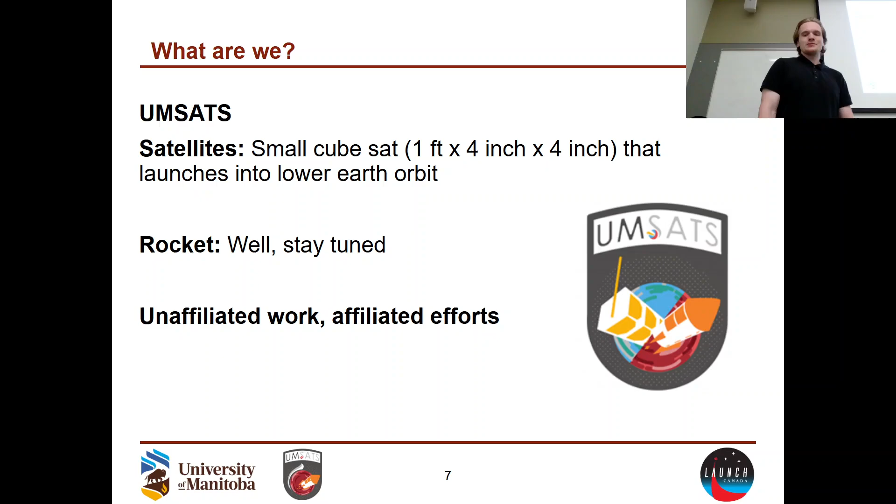Quick overview of how the structure of the team works. There are members, which most people starting off are. Then there are system leads who are in charge of most of the members — I'll explain what the subsystems are, though there's one to two leads for each of those subsystems. And then on top there's an executive committee, entirely elected individuals who run various tasks.

Quick overview of the execs. They're responsible for the upper level things; anything that's not a design typically falls into an executive position. The team leads — rocket lead, satellite lead — are kind of the overall program managers. The business lead is in charge of promotional activities to a certain extent, as well as a lot of the money acquisition projects, fundraising, etc.

HR is mainly in charge of member delegation, monitoring who's where, who's what, why, how regarding member acquisition. Finances is the person in charge of managing the funds we get, a job I'd never want to have. Promos is in charge of the websites, the social media, as well as helping business run some activities. Project manager, similar to promos and business, is in charge of running some of these activities, the outreach events. Whenever we have a booth at the tech talk fairs, project manager is also involved in that. Document manager is in charge of managing the documents, creating documents, making the documentation life easier on everyone. Lastly, president is in charge of everything.

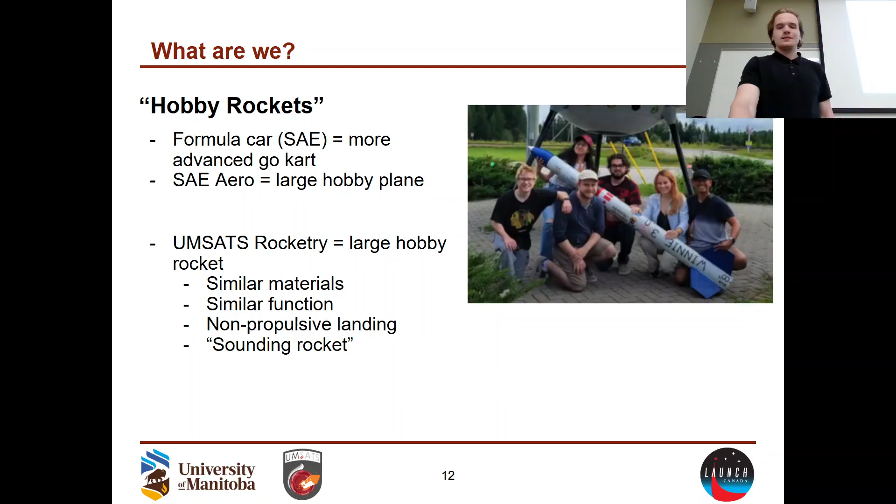I like to use this just to showcase where we are height-wise. We fly right now in the 10 to 20,000 feet range. Planes go around 30 to 35,000, so we're not even at commercial plane height at the moment, but it's still really high to the point that even in clear skies, you're not going to see it. The student world record, I think, is 100,000 feet - a space shot, or whatever that means. Gravity still applies to it.

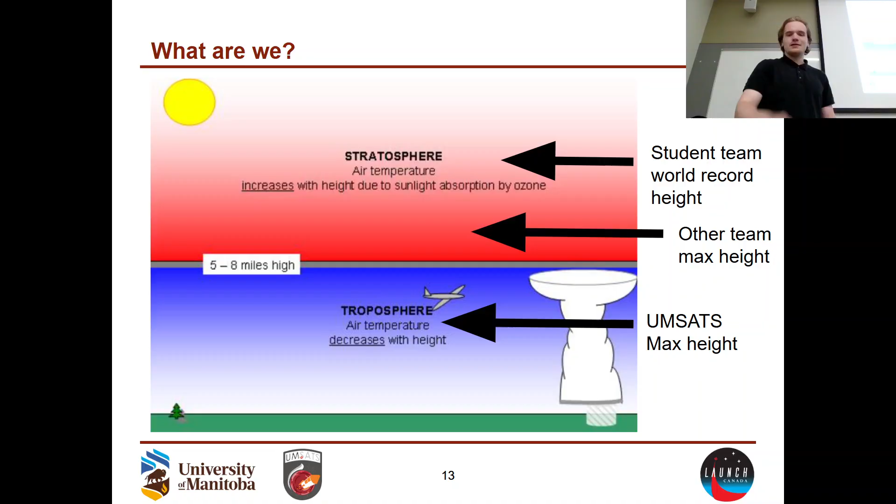Where the heck do we launch? We launch at these two competitions. The first is the Intercollegiate Rocket Engineering Competition - it's an international competition, it's in the name. 170-ish teams from 26 countries was last year's statistic. It's huge, it is a massive competition. Name a university, they've attended it. Name a university, we might have beaten them to technically.

It takes place in Midland, Texas. It used to take place in New Mexico under the name Spaceport America Cup. Ultimately that organization decided they wanted to do more, so they found a different launch site so they could do more.

The other one is the Launch Canada Challenge. You'll hear about that, it gets the name LCC all the time. It's the local one, the local talent. There's a couple high school teams, but name a Canadian university and they're either going there or hoping to go there, as long as they have engineering programs. It takes place in northern Ontario, Timmins - 5, 6 hours north of Toronto, 20 hours from here. They're both far from here, but you'll see why.

Quick overview of what they're going to do in the competition. The first couple of days are the 'check what everyone else is doing' calm-before-the-storm kind of days. You get to go inspect everyone's rockets, ask them a million questions, take pictures - I like this idea, I like that idea. While that's happening, the judges will come around. They'll typically give you a heads up, but they'll look at your rocket and say, 'Nose cone, what's that made out of? What analysis have you done for it? Body, talk about this, talk about that.' Then you'll get some competition scoring based off that, based off the construction of the rocket and your ability to present it to them.

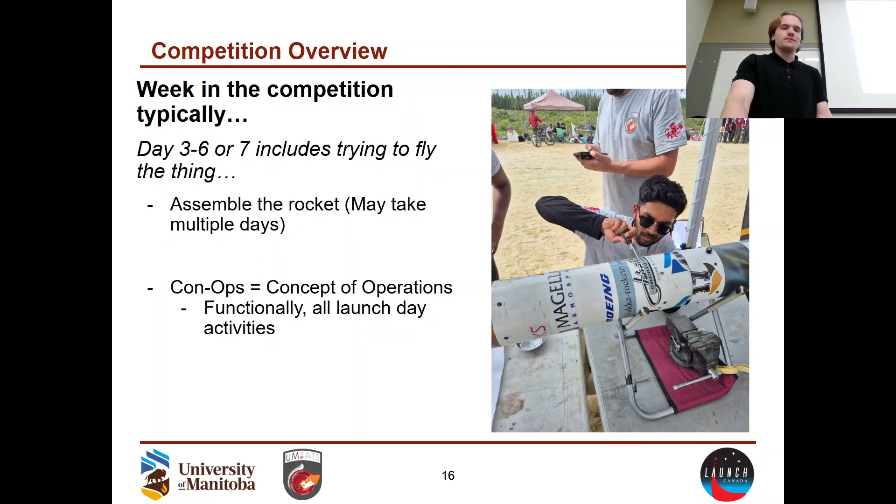Once you successfully assemble the rocket, you're going to line up for this last inspection. They're going to be pretty harsh on you because they're signing off on the rocket and they're saying, "Yeah, I'm cool with this thing going Mach 1. You nuts? This thing's going to easily survive."

Another thing that really makes it fun but also stressful and intense is the fact that at both competitions, there's a first come, first serve system. If you are there at 6 a.m. and your rocket is ready at 8 a.m., and no one else's rocket is ready at 8 a.m., you get to be the first one to launch that day. And yes, there are incentives for launching earlier in the week.

They don't want everyone to ensure their rocket is ready all at once, because I'll ramble about this later - you might not get to launch on the last day, as well as no one wants to launch all 40 rockets trying to fly on the very last day and none in the previous 3 days. So this first come, first serve initiative, as well as the bonus points, definitely adds a bit of stress to it.

Let's say your rocket passes - not always the case. Then you take your rocket to the launch pad. As you can see, there is a launch rail here. This guides the rocket, so it needs a little bit of momentum to fly stably. I'll ramble about that later.

Now is also the time where if you have electronics, you're going to want to turn them on. A lot of the electronics have a battery life of 4 to 6 hours. They're designed to be easily accessible from the outside somehow. I'll ramble about what switch mechanisms there are later, but now would be the time you turn on the electronics.

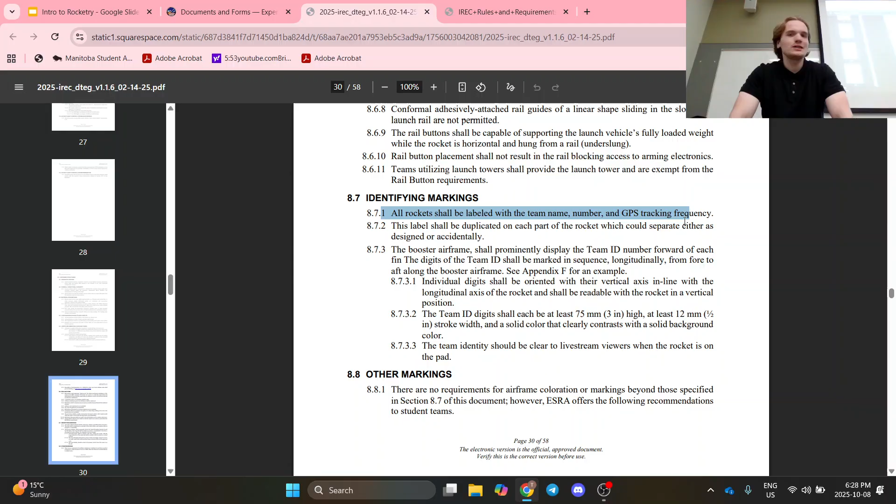Identifying markings, section 8.7. Does this tell me anything I should know before I start painting the rocket? Maybe it does, maybe it doesn't. That's it. All rockets should be labeled with team name, number, GPS tracking frequency. Okay, maybe let's involve that in my painting. Team ID number, let's involve that in my painting too.

A lot of the questions I typically get asked are like, hey, do you think this would fly? I literally just go here first. Similar ordeal with the Launch Canada website. You just go to LCC, or launchcanada.org, and for the IREC one, you go to esrarocket.org. Now you can find very quickly teams, rules and requirements, design test and evaluation guide. So whatever question I have, I would look here first because these are the rules that even I'm going to have to follow.

The other thing I'll mention here, if you go to ESRA Rocketry on YouTube, these guys are really good for showing every launch ever. You can see they even put all of the launches here, so you can just find, say, I want to watch Chosin's launch.

Similar ordeal with Launch Canada, the only thing is they don't do the timestamp thing that IREC does, so you're gonna have a hard time finding them, sadly. I can remember where our launch was, but beyond that, I can't remember anything else.

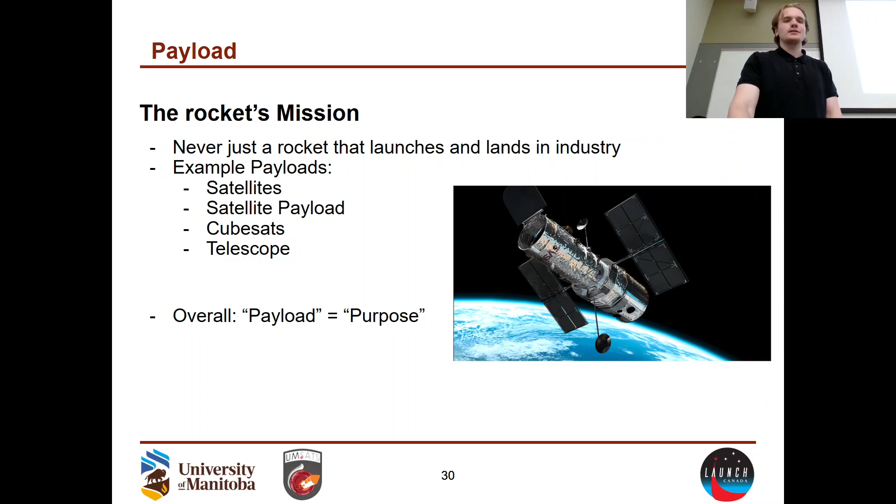In our context, it is a small experiment that utilizes the rocket's flight. I call it backwards because I just said that every rocket needs a payload, but in our case, we are launching the rocket first, and we're thinking, hey, we're going to have a rocket that's doing this. What can we learn from it?

However, this experiment still has value. If the payload is designed right, it can utilize the rocket's flight well. It is the test experiment that is being conducted as we are launching, and it doesn't interfere with the rest of the launch at all.

This is a rule I've heard rumor that it might change. However, in our context, we have to design a payload to be this kind of cuboid structure. It's called 3U. 1U is a 10 by 10 by 10 centimeter cube. You stack three on top of each other, you get this 3U monstrosity.

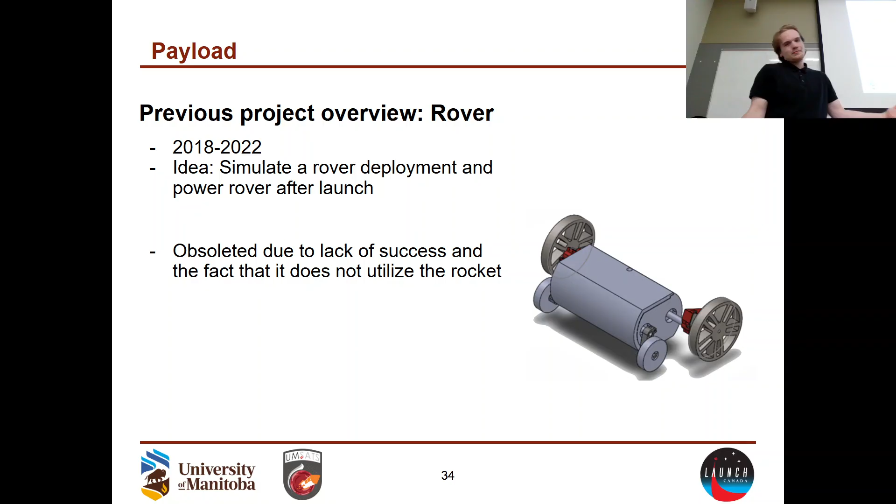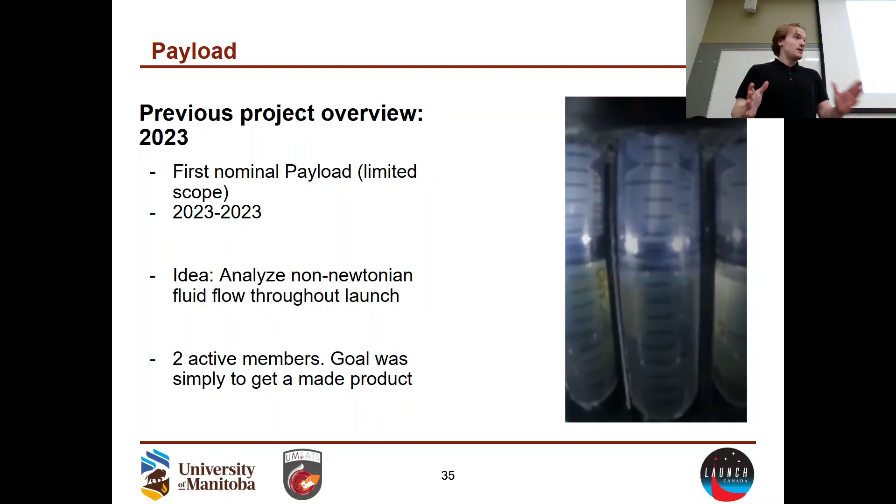Fun fact, this was the first and only nominal payload and first and only successful flight we've had on rocket so far, which is funny because it was a rush payload and many valuable lessons were learned from this payload.

One of the major lessons learned, which is why I call payload the hardest team, is that they have such an obscure problem where you have to do something someone's not done before, do it well, and have it fit in this niche minimum mass cube.

However, the payload still has a lot of purpose to the team. First thing I'll mention is that if you don't care about the rocket, that Pulse idea was really cool. If you're a civil engineer and you hate rockets, well, our rocket is going to analyze fake blood vessels, and it's going to be a concept that we could analyze during flight.

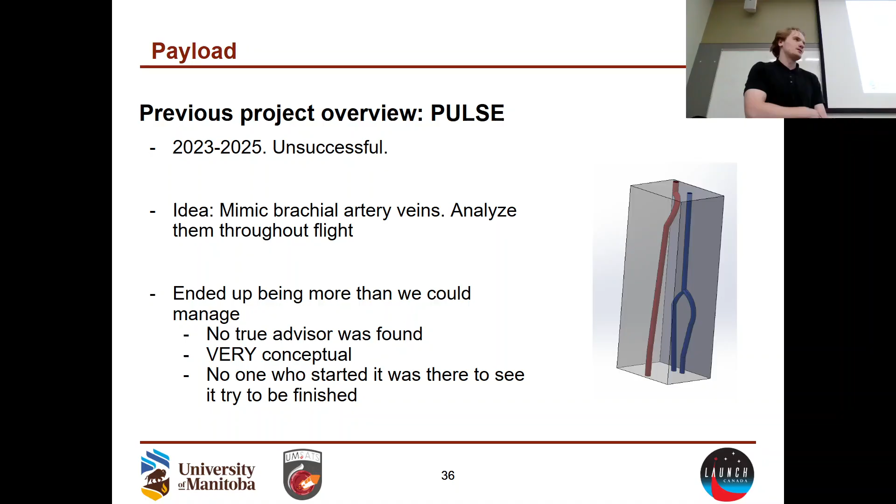The other thing is that all the teams, all the competitions, do have incentives for payload. It does feel like the vestigial organ of the rocket. However, there is a lot of good value for having a payload on the rocket.

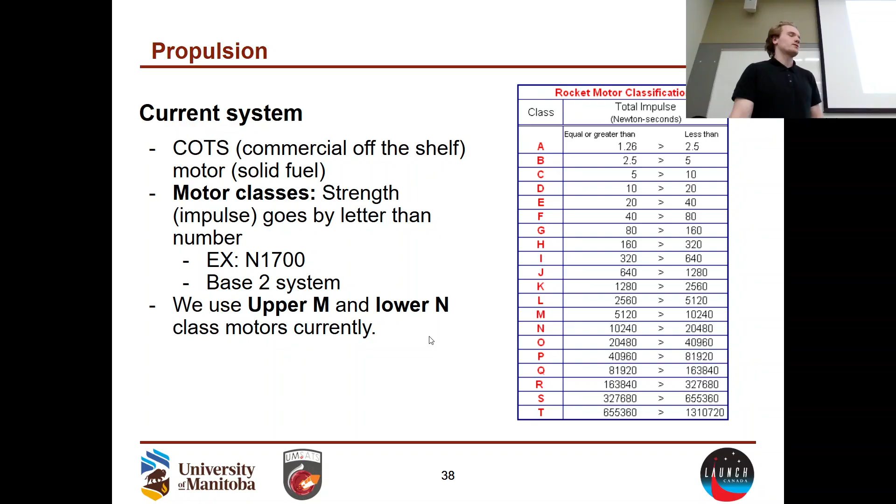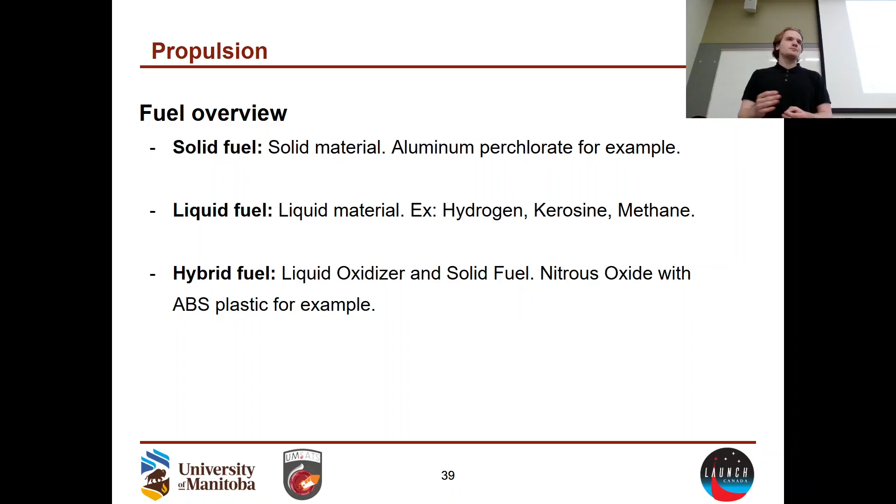Lastly, there's a hybrid fuel, which uses a liquid of some sort to emit an oxygen reaction for the solid.

Going back to the current system, we have two commercial off the shelf distributors, Cesaroni and Aerotech. You'll hear the word Cesaroni a lot more in Launch Canada because they directly deal with them and they are Canadian. The caveat is that they have slow lead times. Aerotech has better lead times, and they are American, so it's easier to get it in America.

Quick overview of the motor casing. The motor system has reloads with codes like M3400 and 1800, and these motor reloads go into these motor cases. The motor case consists of a closure set and the overall casing set. The reloads are one-time use, but if you don't damage the case, you can use it a couple times.

When we aim for the motor, we look at things such as thrust, burn time, impulse, etc. I'll ramble about some of those parameters and why they matter later on. However, it is a bit of a bottleneck because we are limited to what is available in the market and not what is available in-house. We don't really have the ability to modify parameters. We just have to buy what's there and live with whatever lead time or price they give us.

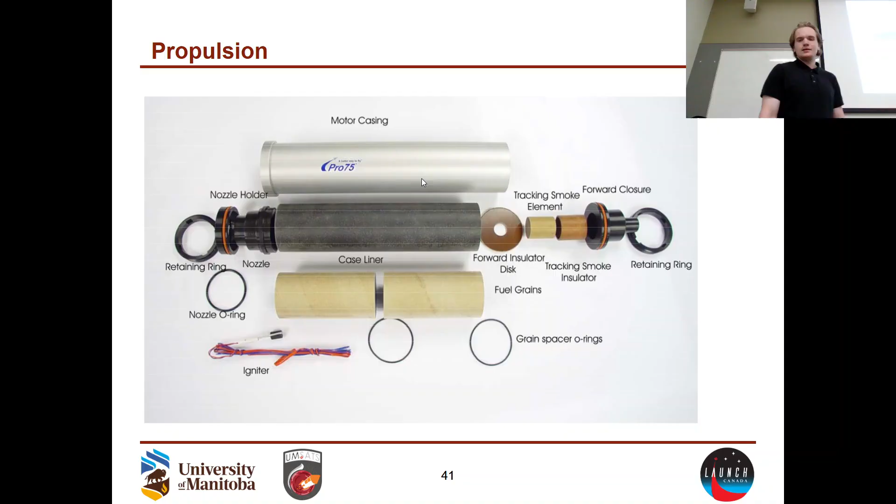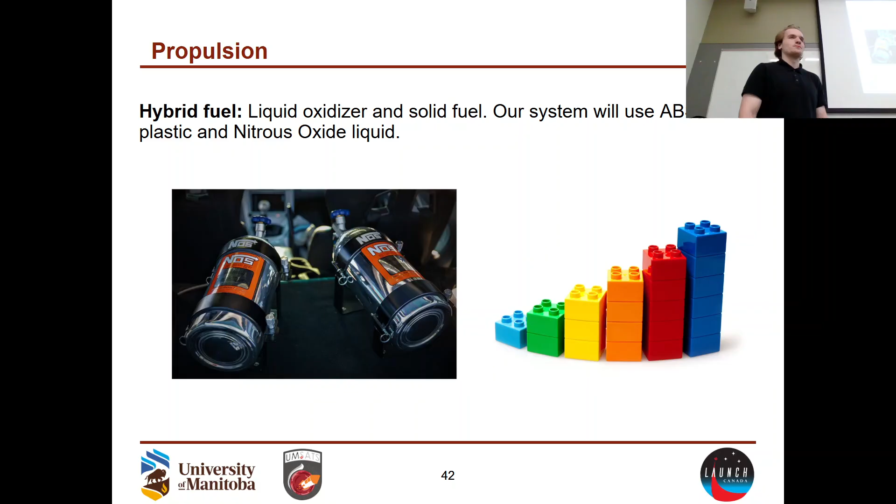Now I can ramble about the hybrid propulsion system. We use a combination of NOS and ABS plastic, so we use laughing gas and Lego blocks, and we merge it, and that's how we are currently developing our own propulsion system. Fun to think about.

We call it Project Sunfire. It started in 2022. As of now, we hope to have a stationary motor test, a static fire, by 2026, and then look to have it in a flight by 2027.

This is what we call the small scale hybrid test. We wanted to verify initial calculations and not spend the entire house on a system. So the motor is about this long, but it did verify a lot of the analysis we had already conducted.

Quick system breakdown of where they're at so far and how they delegate their own tasks internally in this hybrid program. They use an ABS plastic cylindrical bore for the fuel. As we discussed before, there's an oxidizer that is going to go in there and make this ABS plastic way more reactive. ABS plastic is basically a very combustive hydrogen chain, but it's in the form of plastic, so we can 3D print our fuel, which is really cool.

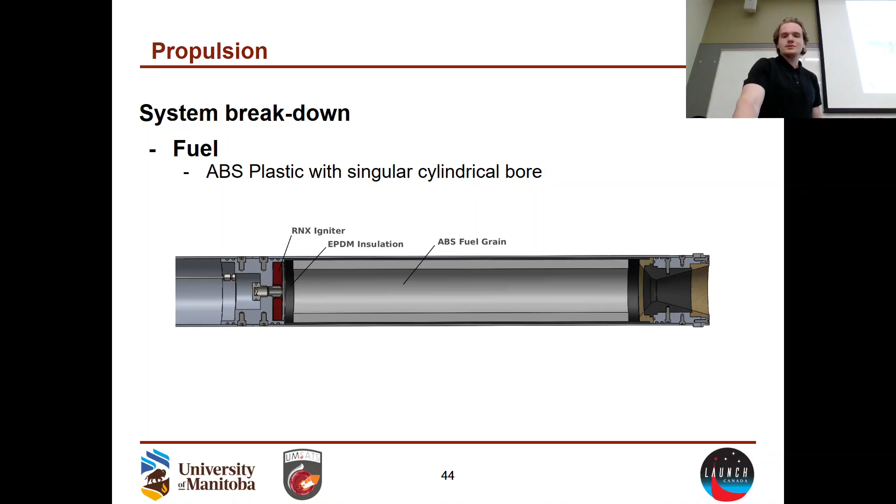Then there's a nozzle, which has the objective of accelerating whatever combustion reaction, which does create the thrust and impulse we want.

Then they want to have the fluid flow in a specific orientation. That's when the fluid supply system comes in. They want to inject it in a certain orientation and at a certain rate, as well as deal with the interesting issue where liquid NOx is not fun to transport, so they want a filling station they can quickly go up to the rocket with and implement that fuel, so we don't have to sit with fluid that doesn't want to be liquid.

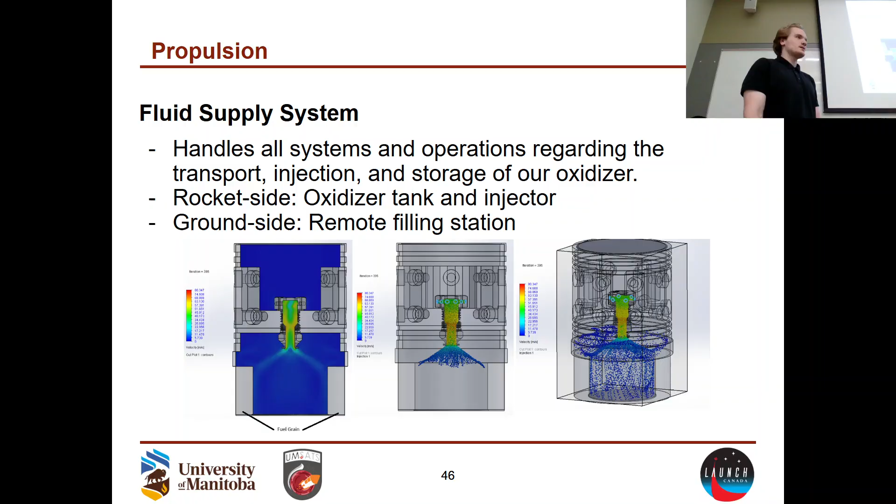There's an igniter system which is in charge of burning the motor at a certain rate and orientation, for a certain duration of time. They want the motor to burn for as long as possible to ensure everything reacts and we don't lose a lot of potential height.

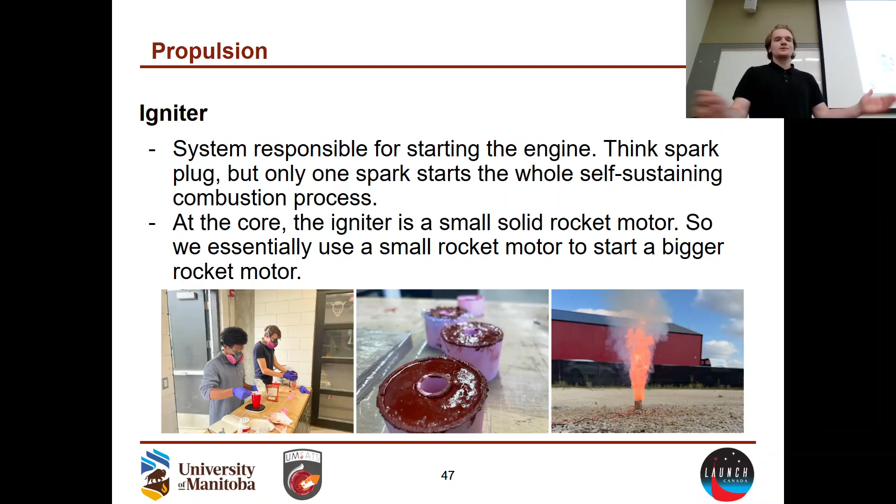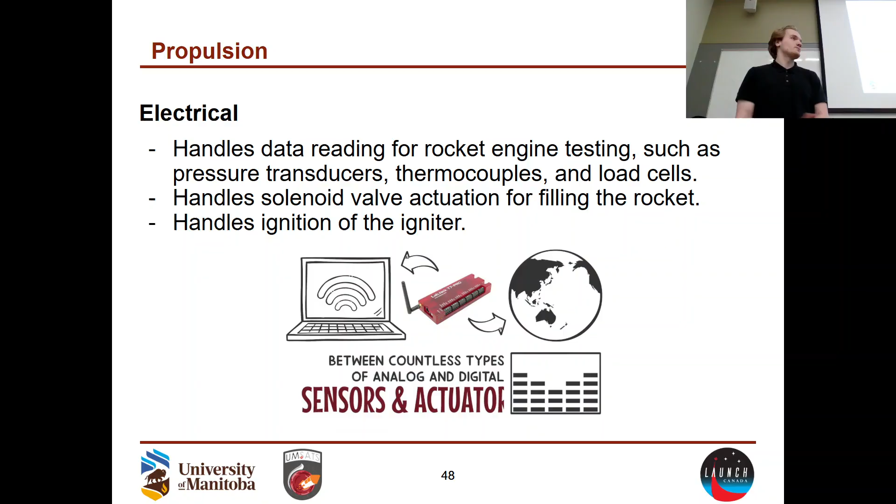There is also an electrical system which is in charge of all of the electrical components, which involve the valves, load cells, as well as what is going to cause the igniter to ignite from far away, because we obviously don't want to be 2 feet from it. We want to be a kilometer away from it.

As discussed before, it started in 2022. Over 50 students to my account, peaking at around 24 members who have worked on it. The static fire target is 2026, and they want to implement it into the rocket in 2027.

Someone just came in and locked the door. Okay, whatever. Next up, the breaks after this, I promise.

Flight dynamics was a brand new subsystem that I invented. The purpose of this team is to design the fins and nose cone to optimize the Barrowman score I discussed before for flight simulations. They're also in charge of specing the commercial off-the-shelf motor, and hopefully, as years go on, more thorough aerodynamic analysis.

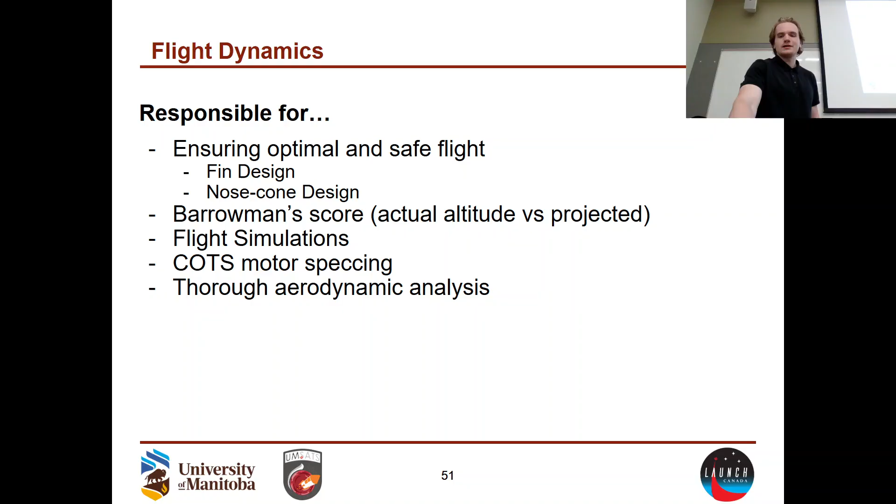In case you didn't know, the top of the rocket is called the nose cone. The fins on the rocket are called fins.

For simulations, we currently use a software called OpenRocket. There are other alternatives, RasAero and RocketPy being the two most discussed. The idea is we trust these guys - I believe OpenRocket was a master's thesis project. We put it all in this software and it spits out flight projection, speed projection, stability, etc. Everything we care about for flight simulation.

The overall idea is that the CAD model, the physical models, and OpenRocket should all, to some extent, agree. It uses the sizes and masses of everything, and you can input commercial off-the-shelf motors or upload your own thrust curve, as well as wind speed. You can implement whatever wind speed will be there, and it factors that into the calculation.

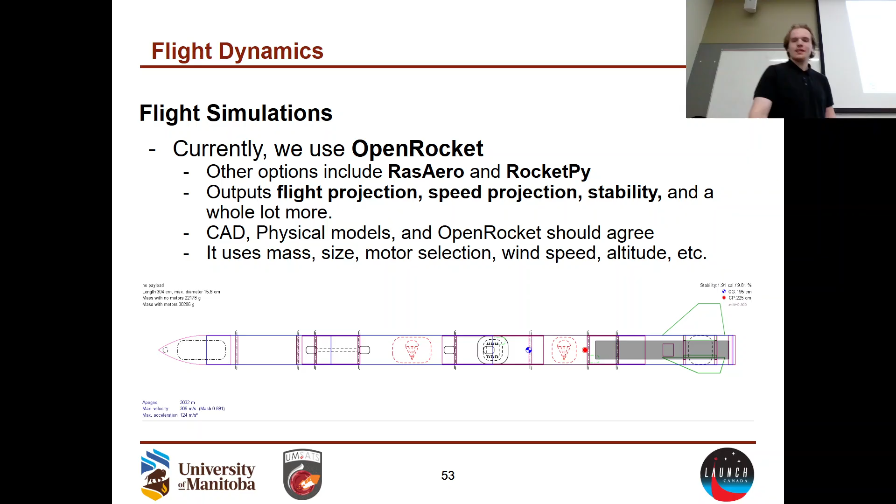To some extent, and as we discussed before, we want those points for accurate altitude, right? So there is some risk we do impose at the moment for trusting everything for OpenRocket. Our good guess for OpenRocket is the best we have for a lot of the points we could be getting. We rely on OpenRocket for a podium position, which is crazy to think about.

Oh, there we go. That's where this project comes in.

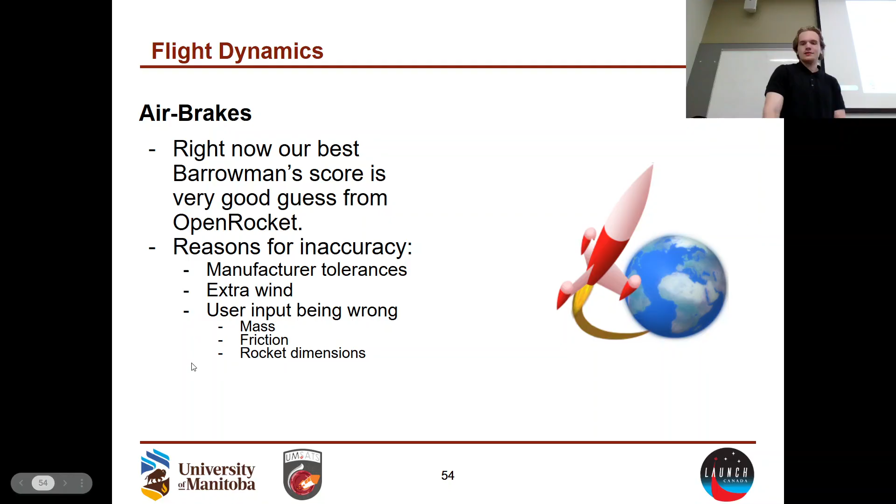This allows us to account for all of this potential information being wrong, as well as it's a cool project. It started a little over a year ago. We're hoping to implement some variation of it in this upcoming rocket.

There's a lot of math and science to it, and the idea of the system is that the first system's going to suck, the next one's going to be a little better, and so on, and as those years go on, we get a better and better Barrowman score.

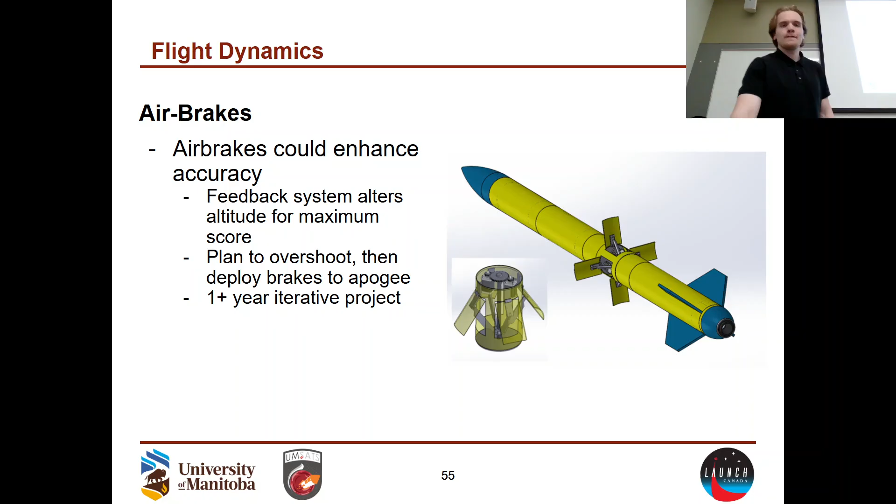Back to flight simulation discussion. Some of the values that you'll see matter. The first one is the stability margin. The purpose of the fins is to lower the center of pressure and keep the center of gravity above.

I believe the metric is calibers - however many times the diameter of your rocket, a caliber is the diameter of your rocket, is between the CP and the CG. So a stability factor of 2 means that you're 2 calibers above your center of pressure - that's where your center of gravity is. Why does rocket stability matter?

Well, as we discussed before, there's these launch rails that are only 17 feet tall, so you have about 17 feet to gain enough momentum to safely fly this rocket, basically.

That being said, there is such thing as a stability that is too high. Everyone has a different upper number - between 4 and 6 are the numbers I've heard the most. The idea is if you're at a certain stability, your rocket starts to go with the wind instead of on its projected path. So we have to do some level of analysis through OpenRocket to ensure that we are stably flying.

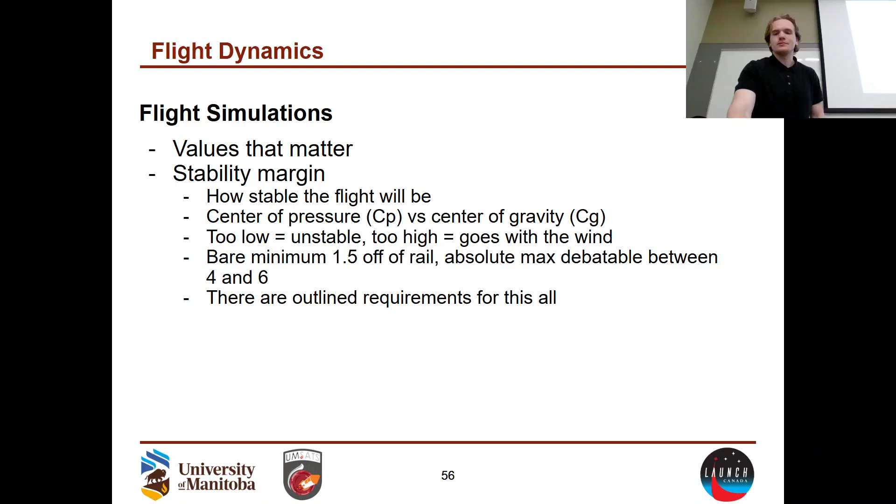It's pretty well worded in the requirements. Next thing, as we discussed, velocity off rail. You have about 17 feet to get to a certain velocity. The number that is safe is 30 meters per second.

However, requirements are going to say 15. If you're in the 15 to 30 range, you typically have a discussion with the judges. They're going to say if your wind speed is less than 15 kilometers an hour, we're going to trust this flight.

That being said, it's also outlined in the requirements. It is a value we're going to watch. We want to make sure that we are adequately fast off the rail.

Top speed - if you're at Mach 1 flat, then the drag is really, really high. So you want to avoid Mach 1. You want to punch straight through it or not hit it to begin with. Supersonic flights generate a lot of heat. Subsonic flights do allow us to get away with a lot. Historically speaking, we've had Mach 0.8 to 0.9 flights, which is really fast still, but that has definitely permitted us to do a lot dumber stuff than this year's flight.

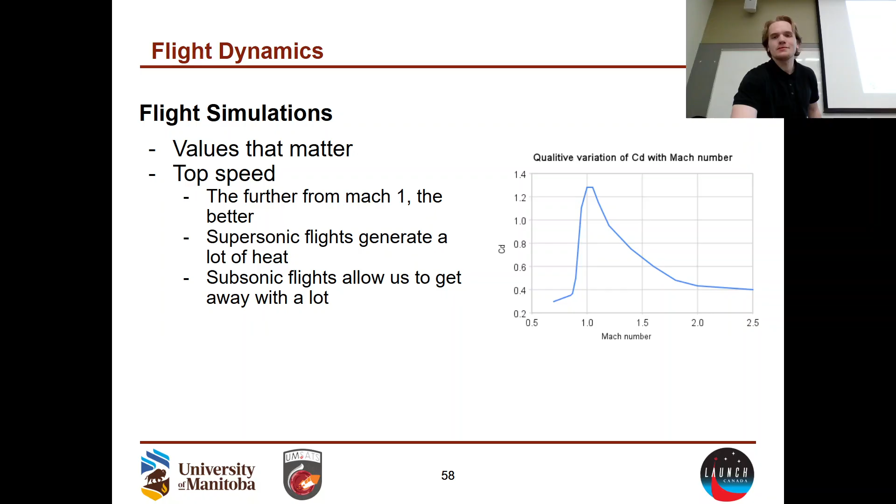Quick overview of the nose cone design. For subsonic flights, a round tip. For a supersonic flight, a really pointy contour. Transonic is between subsonic and supersonic - that's the Mach 0.8 to Mach 1.2 number discussed before. Please don't go there. Please don't peek around there. Please avoid that speed.

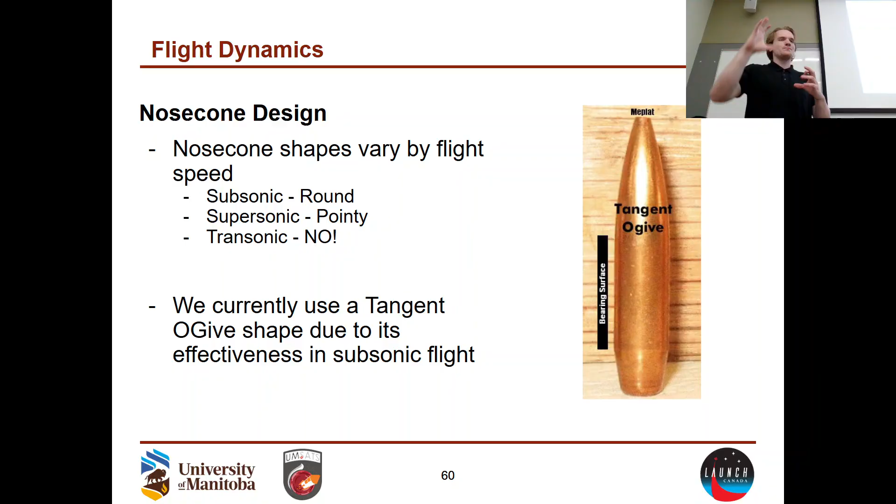Past couple of years we had this tangent ogive shape, which you can see here actually. There's a mathematical way to derive it, as in this mini rocket I made. The big picture point is that the shape is that shape for a reason. So let's not have a flight that's not within the threshold we designed the nose cone for, please.

Fins - I mentioned this before. You want to drag the CP back and have the center of gravity higher, CP being center of pressure. OpenRocket does help optimize the fin shape as well.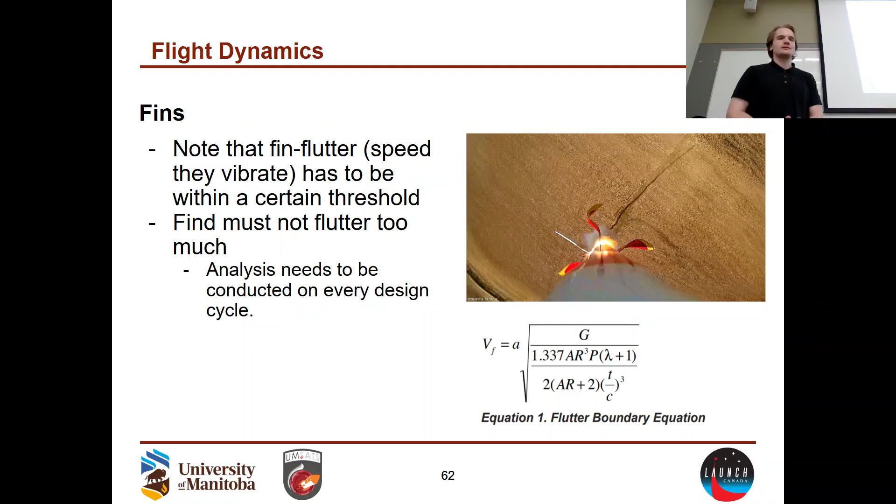More fin analysis that's done is called fin flutter. Ideally, you don't have this much flutter. There's a certain threshold that the speed the fins vibrate has to be within, and there is analysis conducted to ensure that it is within that threshold.

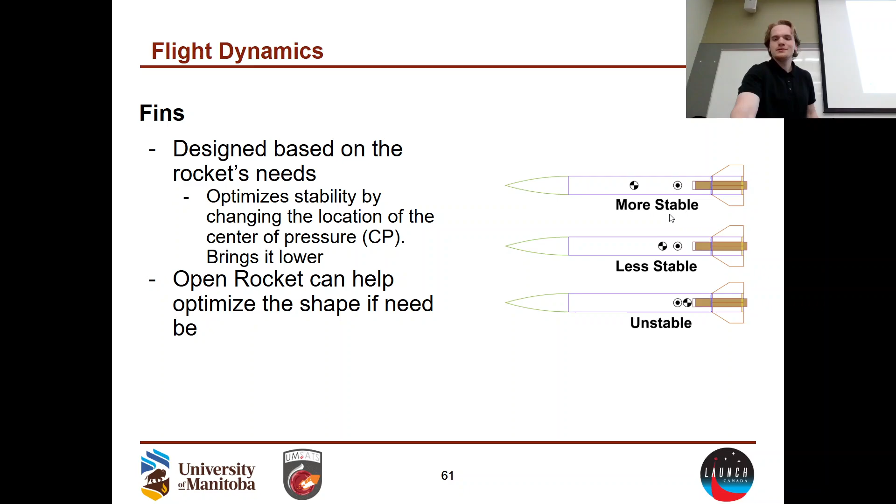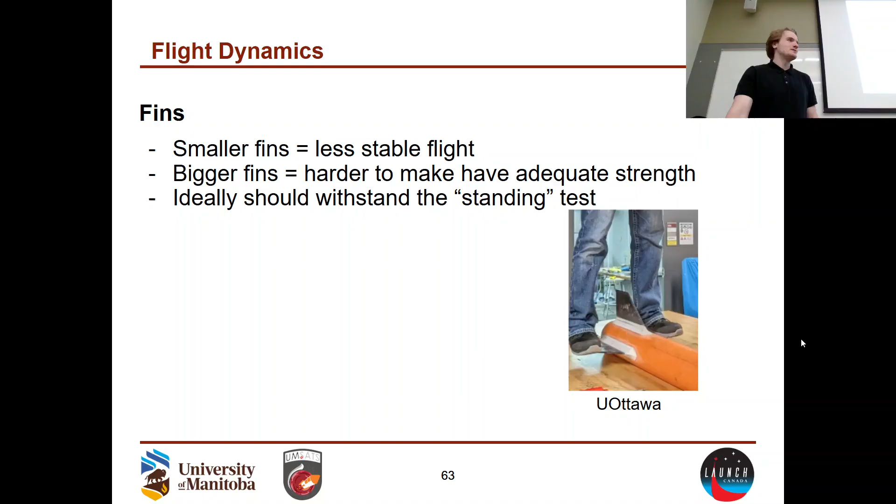There is this balancing act with fin design as well, I'll mention. If you make smaller fins, you have a more upward center of pressure. If you make bigger fins, you're gonna have to justify the strength of them better. All in all, if you can stand on them, like UOttawa did here, you're good to go.

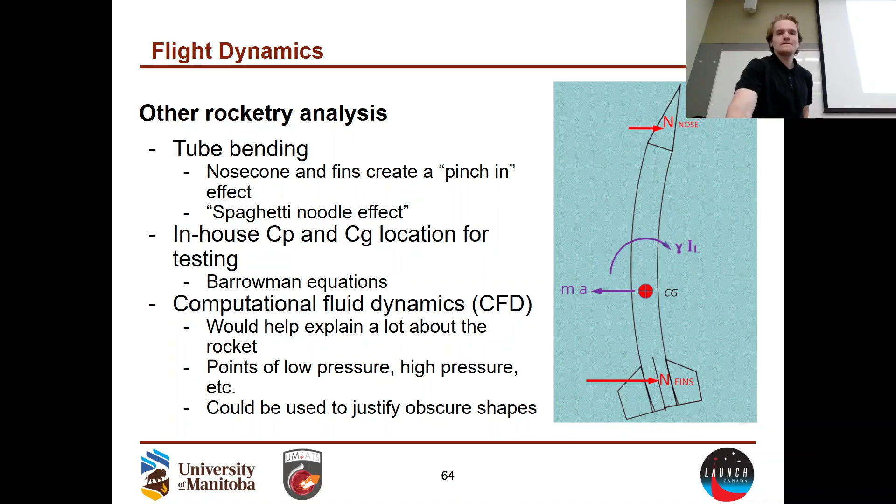I want to break it. I can keep going if you all want to. Yeah, yeah. All right. Any questions? I either explained it really good or really bad, I hope. All right, I'll go back and do it. All right, I'll get to it then.

Recovery. As we discussed before, SpaceX does a lot of propulsive landing launches. We're not allowed to - that's a bummer. The solution is we separate the rocket somehow, segment it out, and we land with the parachute system of some sort.

Separation - sorry, I should have mentioned this here. We typically segment recovery tasks into two categories: separations and parachutes. Separations is in charge of separating the rocket to deploy the parachutes. There are some - go ahead.

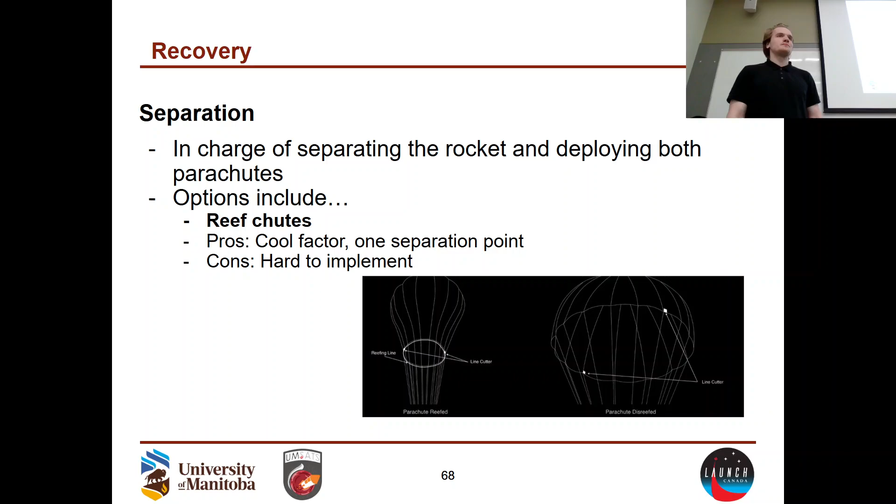I have a whole demo. You put the shear pins in. Also, for context, shearing is a failure mechanism that is caused by bolts breaking radially.

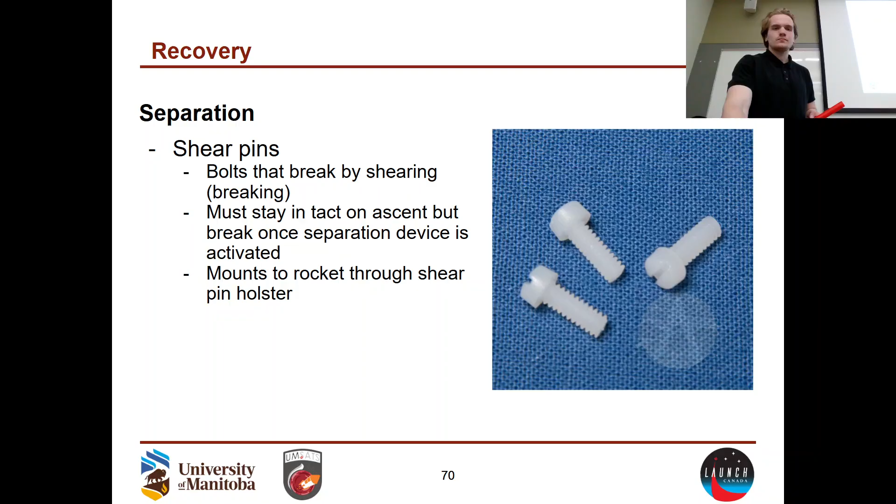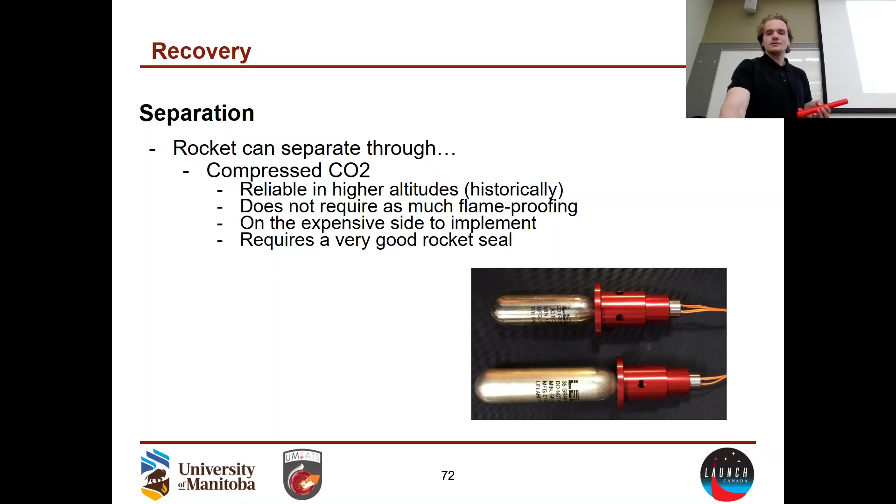Then, if you want to separate the parachute, you literally break the shear pins, and plastic bits go everywhere at 10,000 feet in the air.

Hobby rocketry - you want to do some level of analysis to justify that the amount of black powder and CO2 you use are sufficient. Even after the analysis, you're going to want to test it.

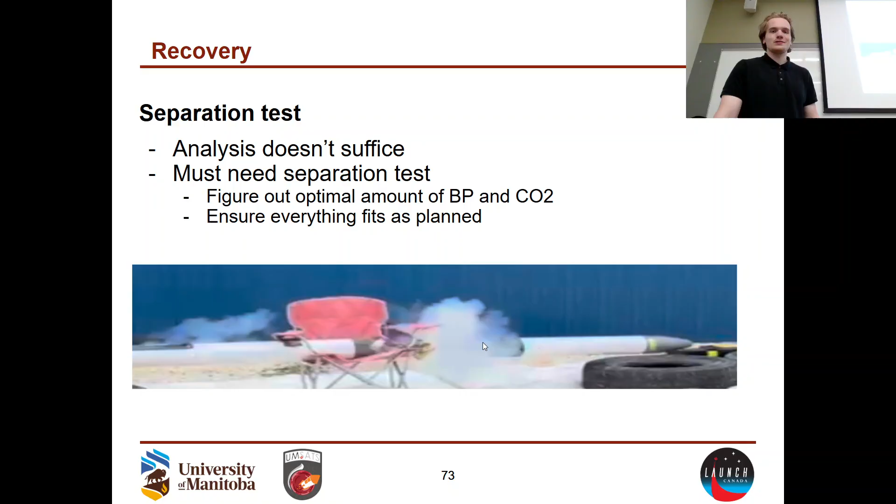There's plenty of clips on our Discord of explosives and the rocket we're planning on launching a week from now go everywhere. This one we used way too much black powder by accident, as you can see by the fact that it is not touching the ground and has moved a solid 5 or 6 feet.

The overall issue with separation that you're going to hear a lot is there's this massive area where your design is applicable. You want your shear pins to comfortably survive flight. So let's say we've designed the shear pin system accordingly. Then you're going to have the issue where you want your black powder to comfortably break the shear pins, but not cause your rocket to explode into pieces.

Depending on who you ask, they would put the amount of black powder they'd want in the rocket in a different spot on this spectrum.

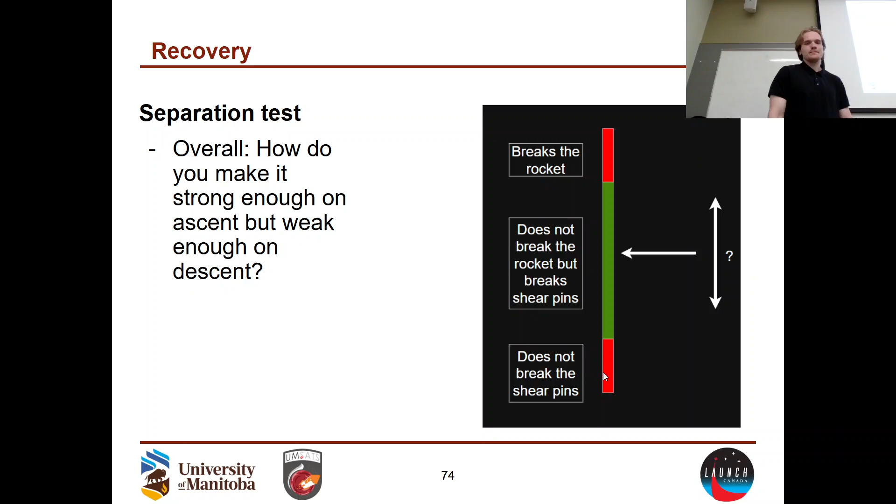Quick overview of the parachutes. I talked about drogue and main. Maybe I should have brought the parachute system up first. Anyways, the first parachute is called the drogue parachute. Its purpose is to bring the overall rocket to a terminal velocity that is not Mach 0.8, because the main parachute brings the rocket to safety, and the main doesn't typically deploy until around 1,500 feet. Why not deploy the main at the top? I believe the reason is that the wind will take it very far, and you'll have to travel very far to find it, if you can even hold a GPS signal that far.

Both of these have very valuable purposes, both have their own interesting function. We currently design our own parachutes. SRAD is doing research and development. Parameters that matter are when we deploy the parachute, what the speed is at each deployment, size, shape, material, and this magical coefficient called the drag coefficient.

If you want to find the force that is emitted anywhere, these are all findable values: area, velocity, density. However, this drag coefficient is kind of a magical value, like I made it up in a dream. If you search up the coefficient of drag of any Tesla model, it'll spit a number out at you, but the reason they got that value is through experimentation, not analysis. So when we talk about the analysis for parachutes, everything goes through the drag coefficient. So we have this interesting issue.

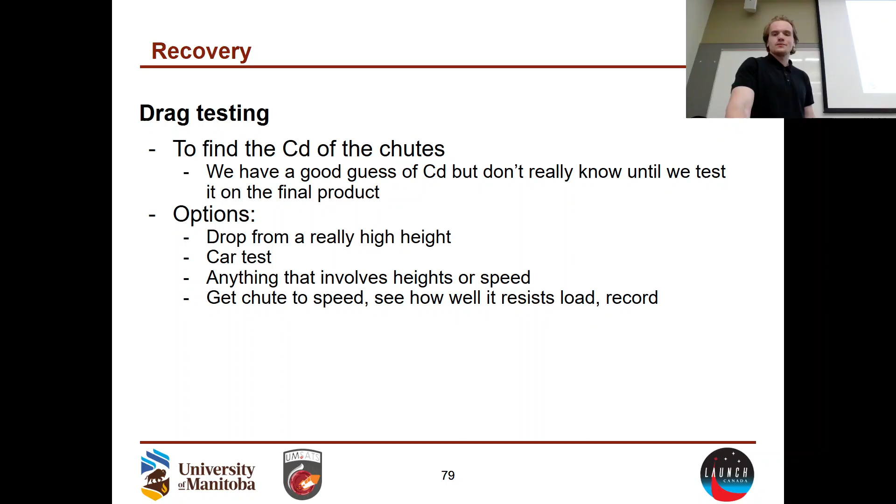Other things that matter when we talk about parachute design: how exactly you're constructing it. There are these things called gores, the triangles that make the parachute. How big are they? You need to fit the parachute into the bay, into a certain segment of the rocket, this big, for example. How are you going to make it? The main parachute last year was 3 meters in diameter, huge, it could be a table cover. As we discussed before, there's black powder that goes into separation, and that's flammable, so how are we going to induce proper flame resistance?

Another thing to note for parachute design is how we connect it to the rocket. We call this tethering. You want a tethering design that orients the rocket so components aren't clashing together, but also one that can hold the forces of drag throughout the launch. You'll hear Kevlar and nylon used as tethering materials.

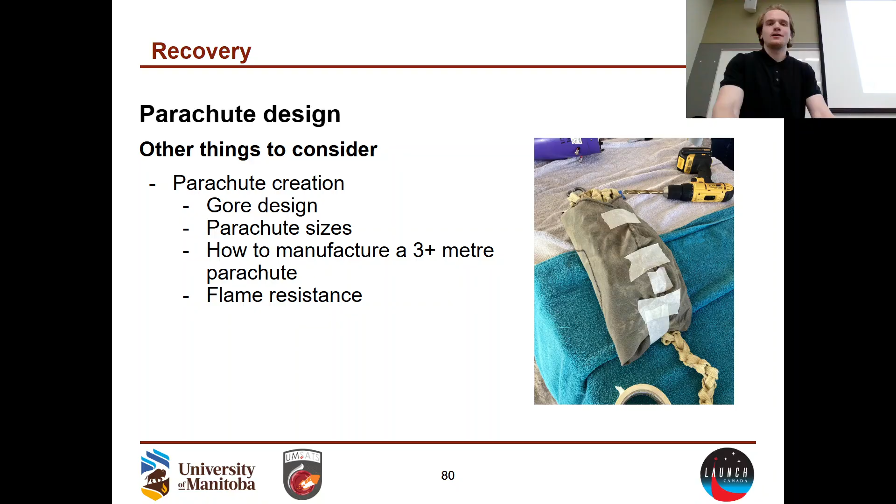This is a sample of Kevlar tethering. It's tied into a knot called a chain sinnet knot. The idea is if you pull on the knot, it absorbs an initial load to untie, so it helps absorb energy better than other knots, as well as helping compact everything.

The other thing to note is you want to fold your parachute very methodically. You're nowhere near the parachute when it's being deployed, and you want to make sure that if you pull on it, it spans out, because if recovery fails, the rocket does not survive.

You'll hear the words chain sinnet knot and Z-fold at the top level discussion. The Z-fold is literally if you grab a piece of paper or a plastic bag and fold it repeatedly. The idea is if I pull here, it fans out and won't have a personality of its own. That's how we ensure the parachute comes out cleanly.

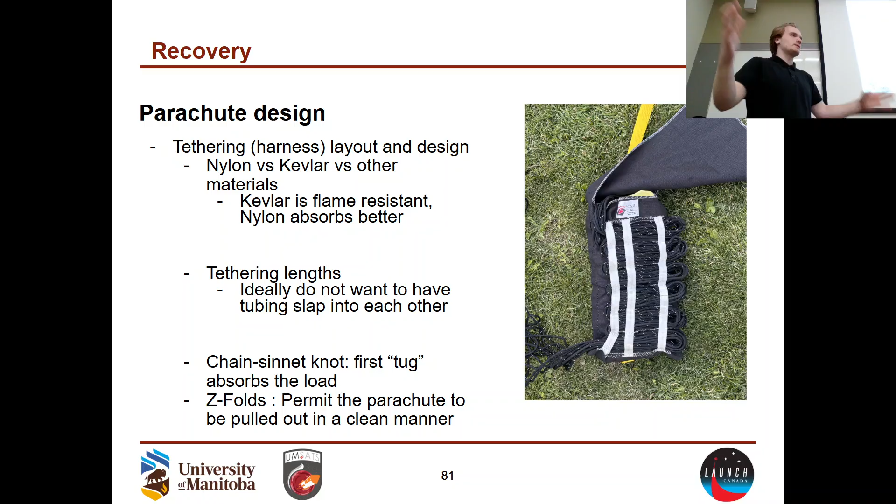Regarding linkages, there are two links you'll hear talked about with recovery a lot. First is a quick link. This is a quick link, it just connects components together. There's nothing fancy to it, we just need tethering to connect places to other places.

The other link commonly seen is called the swivel link. The idea is it can spin about itself. Every link other than the one the parachute directly connects to is a quick link. We want to minimize spinning, so only the parachute can really spin about that point. That helps if the rocket spins, creating a counter spin from the swivel link.

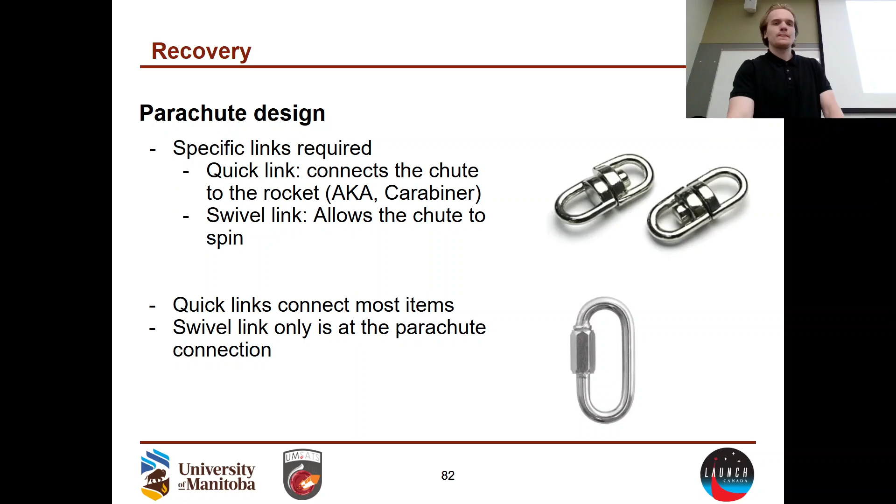When we connect parachutes to the rocket, there are two kinds of bolts you'll see. The eye bolt is smaller and more compact. So if you have a very complex rocket design and want to take the risk of potential unthreading from components spinning, vibrations, etc., the eye bolt is the solution. We successfully used only eye bolts on Winnie 5.0.

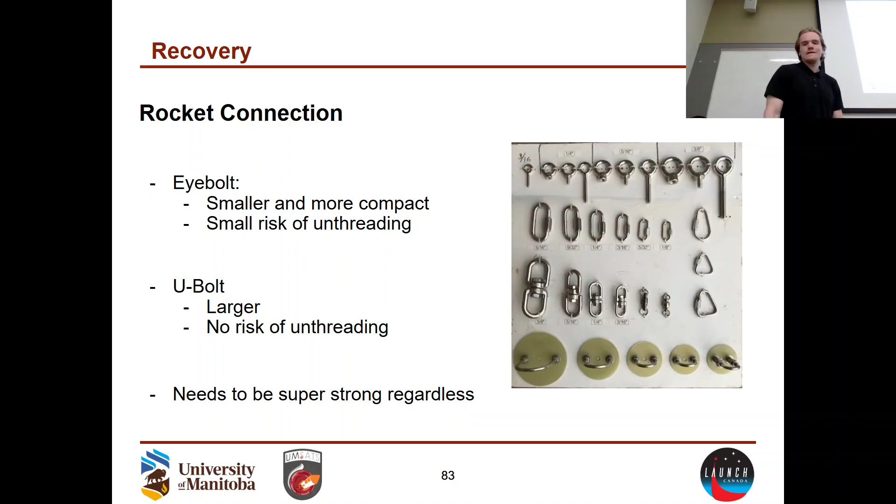Separation test, as discussed before, now that we know what the parachute is going to look like and what's inside of it, is another thing we look at when we separation test. We want to make sure not only that our analysis regarding separation is punching the rocket apart correctly, but also that it's not going to set the chutes on fire, as well as how the chutes change the bay interface and bay size.

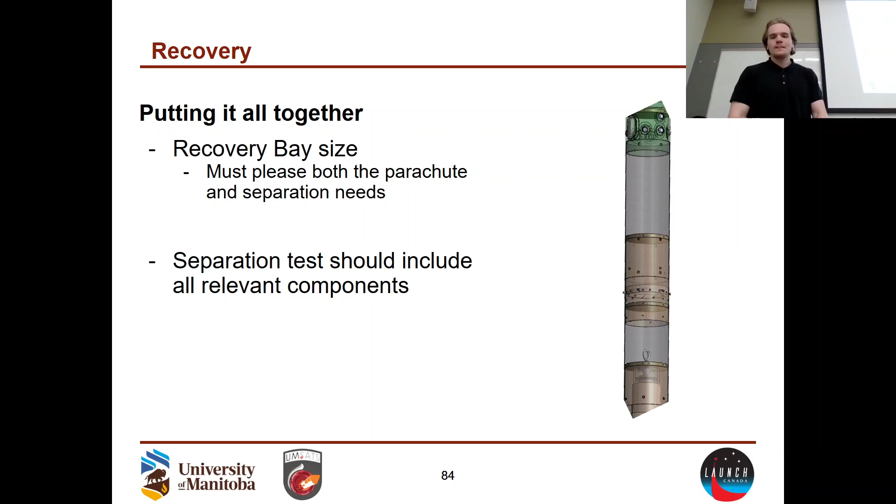Quick overview, I had a lot of small pictures. Separation happens around here, there's the drogue, and there's the main chute.

Avionics - I didn't realize this till about third year. Anyone know what avionics stands for? Aviation electronics, that's why anything that flies gets called avionics, and why nothing else has that nonsense term. Avionics is just electronics, avionics. Why? I don't know.

Quick overview of what avionics does. The recovery moments we talked about before all have an avionics aspect to them as well. Data acquisition - we want to know how fast the rocket goes, we want the whole story of the rocket, as well as things with the camera system and GPS as discussed before. We want to find the thing after we launch it, it could end up in dense forest.

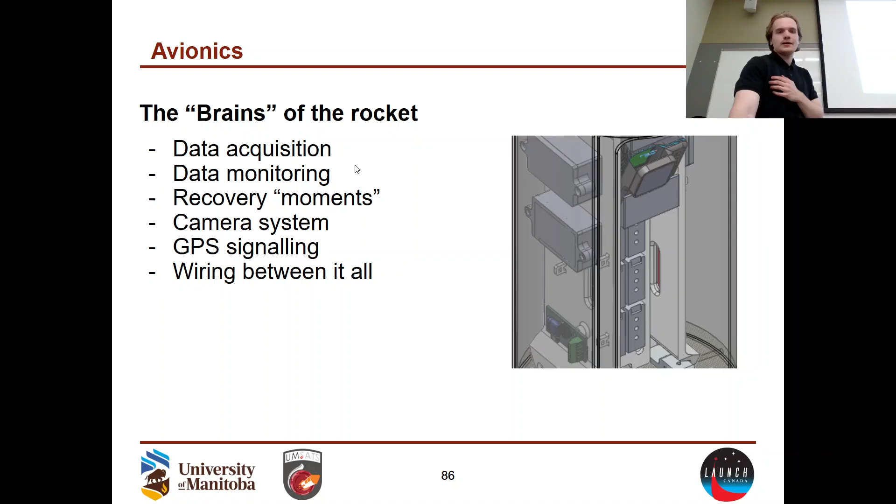Currently we have two commercial off-the-shelf computers. There are a bunch of other viable computers, but these are the two we use - we have to have two, one to back up the other. Right now we use the AIM Extra and the Blue Raven. The AIM Extra distributor is a guy from Minnesota that a couple members have on speed dial, which is something to think about. The reason we currently have two different ones is because yes, the potential failure modes do double, but there's no failure mode where if one happens it causes nothing to deploy - we're not going to see that twice. That was the thought process behind it.

Quick overview of some of the sensors.

First, the altimeter. We measure the height of our flight with barometers and math. The density of the air changes as you go up, and it uses that as a reverse calculation to tell how high it's going. To accommodate for that, we need holes of certain sizes based on how fast we go. There's a spreadsheet that the poor avionics integration guy has to plug in, and it's something we typically forget to do until the very end.

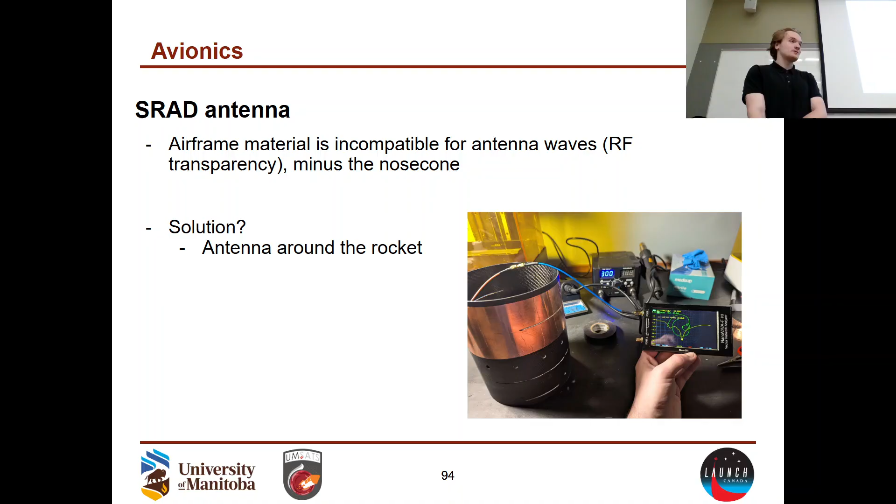I discussed this before - there's some kind of arming system needed. The handful of options are key switches, Fingertech, which is basically a glorified screw switch, and a screw switch. This is what a screw switch is. The idea is you can pop open a small segment of the rocket, or you can have this mounted on the side of the rocket.

As the screw connects inward, it completes the circuit. We did use key switches before as well - it is literally what it sounds like, a car key that goes in. We didn't like them because they oftentimes either electrically or, less fun, mechanically failed on us.

The big caveat with screw switches, you'll hear this talked about - I believe we had a system to fix this in last year's rocket - but if you unscrew it all the way out and your rocket's on the launch pad, then the screw might just fall out, which is also not fun.

The other thing, whatever system screws in the screw switch will have a beeping noise. You'll hear that in ConOps - the ConOps will explain in the checklist what the beep noise is supposed to sound like, and how we know it's actually on.

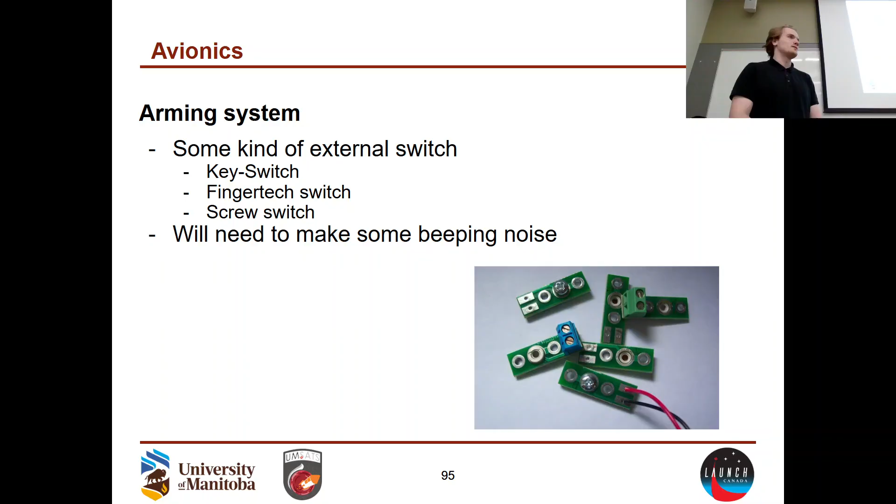All right, airframe time - let's put everything together. The one reason Gavin's here.

Airframe is the house, the skeleton, the thing you take your cute little selfie with. Their main job is to keep everyone happy, implement everything, and make sure the system doesn't break in on itself.

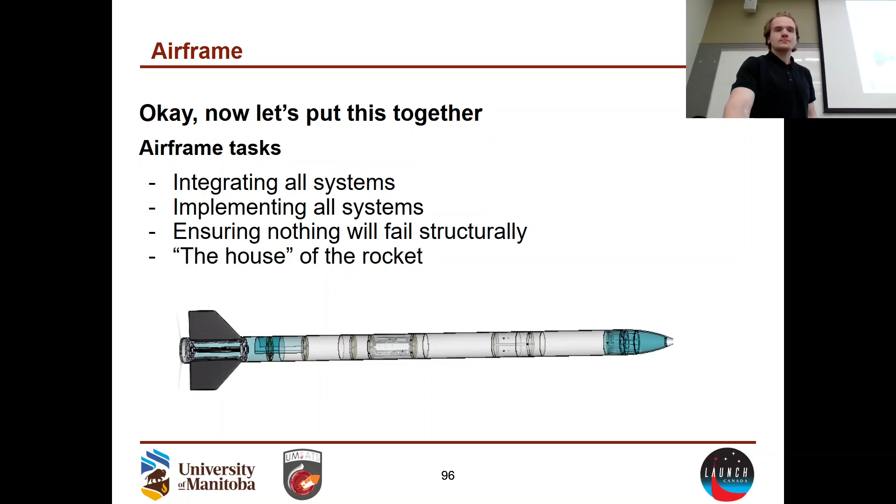First, I'll talk about the structure. You'll hear a lot of teams use carbon fiber, fiberglass, or other materials.

Fiberglass has the RF transparency benefit, and it's kind of the Goldilocks zone in price, where it's not the crappiest stuff, but it's not the most expensive stuff. The strength normally, unless you're going crazy speeds, is sufficient. But it's not the strongest material out there. Yes, this is the same fiberglass that goes in your insulation. It's just not gonna poke you unless you're an idiot with a sander.

Carbon fiber, our bread and butter, I'll ramble about this later. It is the most expensive if you buy it off the shelf. It's not RF transparent. However, it is noticeably the strongest. I believe the ratio I've heard is if you're making your own tubes, 3 layers of fiberglass is equal to 1 layer of carbon fiber, give or take.

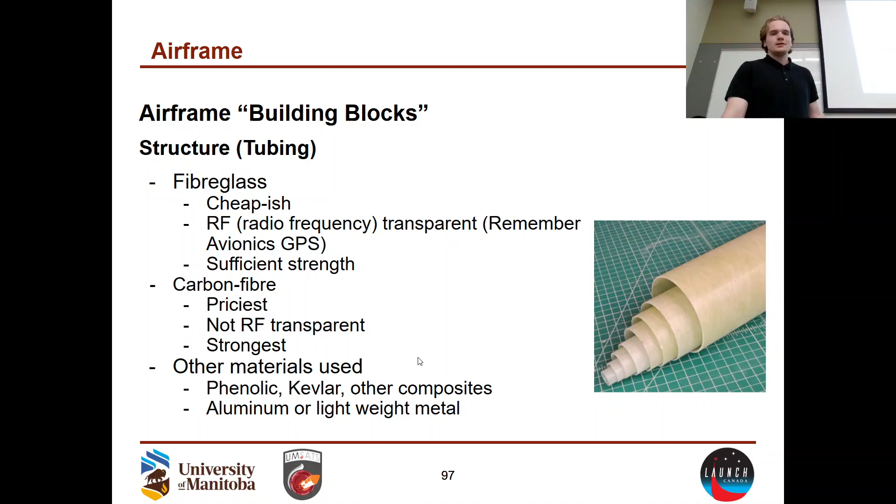You'll hear other materials used for the tubing material. Aluminum, when you have hybrid propulsion, they typically make that segment out of aluminum, the oxidizer section. I've heard Kevlar be used before. I've heard bad things about Kevlar, but these aren't the only two materials you'll see used.

Our bread and butter is carbon fiber because we get it for free. Magellan gives us material that they don't want. It is called pre-preg. Carbon fiber is literally a carbon fiber cloth. This material is pre-impregnated with some binder called epoxy. You lay it up around an aluminum tube. The idea is the aluminum tube heats up, expands quicker than the carbon fiber. The tubing cures into this tube shape.

We use two kinds of tube. There's structural tubing, main, and coupler. The coupler tubing is kind of demonstrated here. It's smaller than the tubing diametrically, should be roughly the same thickness, but the idea is it's kind of a strut type of material. It's how we bind the two tubings together. It needs to be in this Goldilocks zone of tightness where you have to press a little bit to fit it together, but you shouldn't require all of your strength to push it together. I should have brought the physical rocket. But the coupler is how we connect two pieces of tubing together.

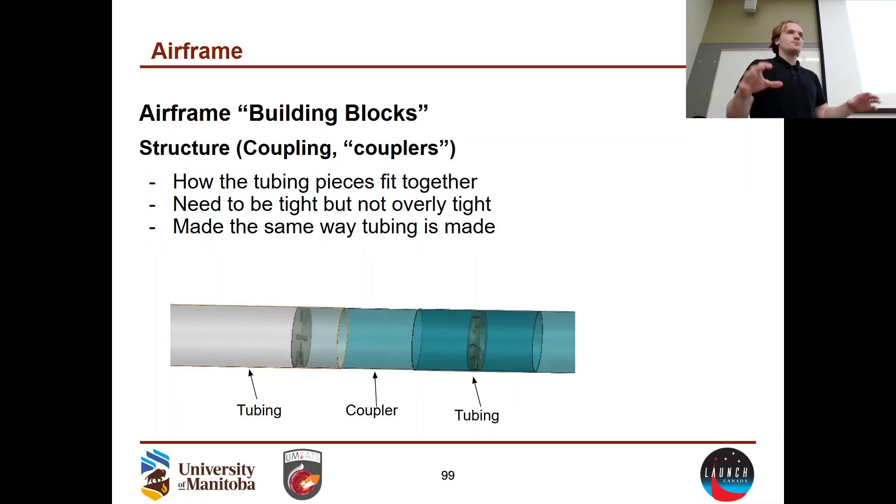Bulkheads, I like to use the word floors or page dividers. They're how we segment parts of the rocket from each other. It's kind of an all-encompassing term because the thrust transfer bulkhead, the recovery bulkheads, and the payload bulkheads all have different requirements. But they're these circular discs that we use to segment the parts of the rocket from each other. Fiberglass, aluminum. I haven't heard of any other materials than fiberglass and aluminum being used, but that's kind of what a bulkhead is.

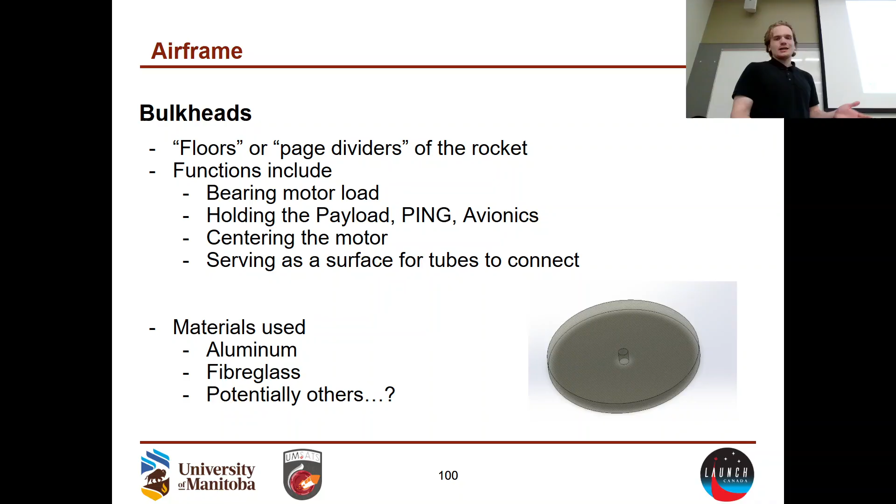Nose cone, we make it 3D printed historically. I rambled about the potential of heat generation before, this is kind of where this discussion's happening. The reason we 3D printed our nose cone is because we could, because we were going Mach 0.8, the heat generation was negligibly small. If we could prove that a 3D printed nose cone was structurally sound enough, who cares how much heat was generated? Virtually zero. A lot of teams do use fiberglass or carbon fiber to make their nose cone. However, something I personally hope we develop is a fiberglass or 3D printed nose cone. As I rambled before, we had the GPS in the nose cone for that avionics compatibility. It let us get away with having the rest of the rocket be carbon fiber and not have to care about RF transparency. The other things we'll want to consider is obviously that it's strong enough. It's the thing that bears a lot of heat and load.

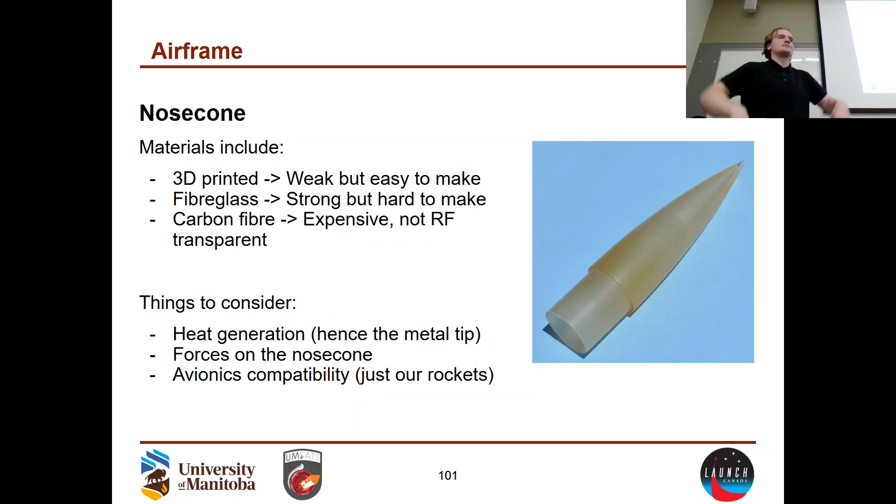Now we're going to talk about how we're integrating everything. First, propulsion integration. I have it 3D printed too. This is a mini motor. This mini motor has the closure seal disc. It has a little bit of a lip. So what we do with this little lip is we have a thrust transfer bulkhead that I press fit in here and I'm not taking out. The idea is we use that little lip to transfer all of the rocket's force up the entire rocket.

That's the main thing being asked about the propulsion system: how are you transferring the load? We're putting it through here and it's transmitting the force up the tubes. There should be an eyebolt here. The top here is recovery.

This was a really fun thing to figure out and make sure it wasn't going to screw the rocket over. When you look at how loads are analyzed, the recovery system is only going to pull up here. So not only is this thrust transfer bulkhead going to bear all the load going up, but the drogue chute forces also go to the thrust transfer bulkhead, which... I'll just leave it at that.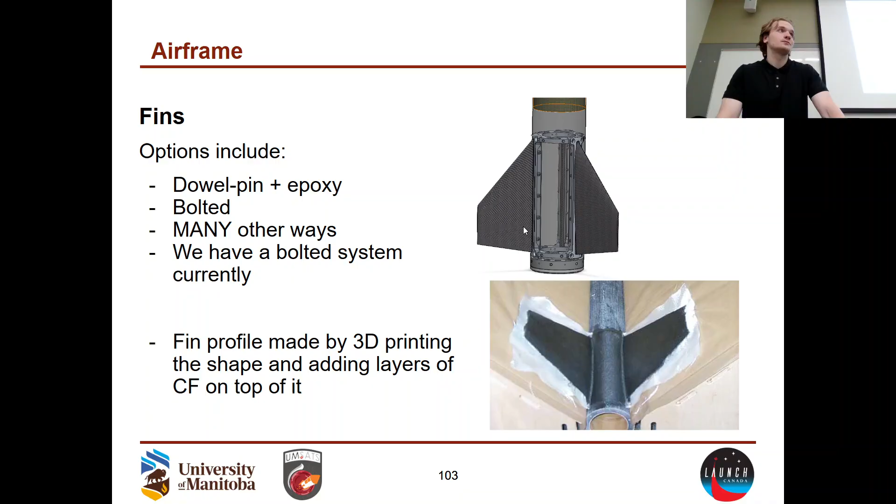Recovery integration: first thing, obviously, you want the bay size to match what Recovery wants. Recovery did their analysis, now it's on you to make it a physical thing. The other thing I'll mention is zippering.

This is a really hard topic to explain, but I'll try my best. Imagine there's a string coming out of here. When you push it here, you're gonna see that this is gonna want to do this, right? If there were a string here, that string might go straight through that tube, because that's not a load these tubes are per se designed to bear. They're way better at dealing with loads like this, not there.

So that's a historic problem we've had. It's called zippering, where the tethering goes through the tube, kind of shown here in this crappy YouTube video cover I saw.

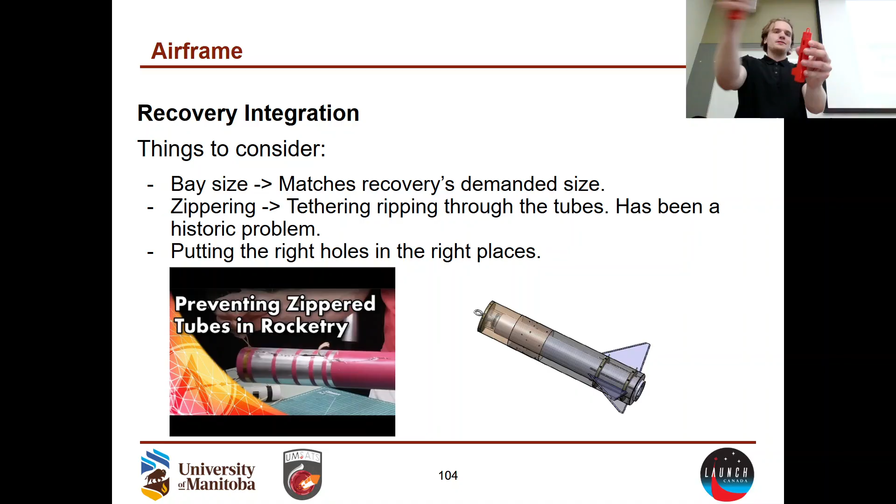The way we address that is by having it so that no zippering can happen. As you see here, it pops out this way. When it pops out this way, there's nothing for the rope to tug onto. I don't know if it works 10 out of 10, but that's how we've historically addressed that zippering concern. And it worked last flight.

Avionics integration is very much a simple game of make everything fit, please. They're going to have a lot of needs to fit batteries everywhere, and wire management isn't fun either. Lastly, you want to put all switches in a readily accessible position.

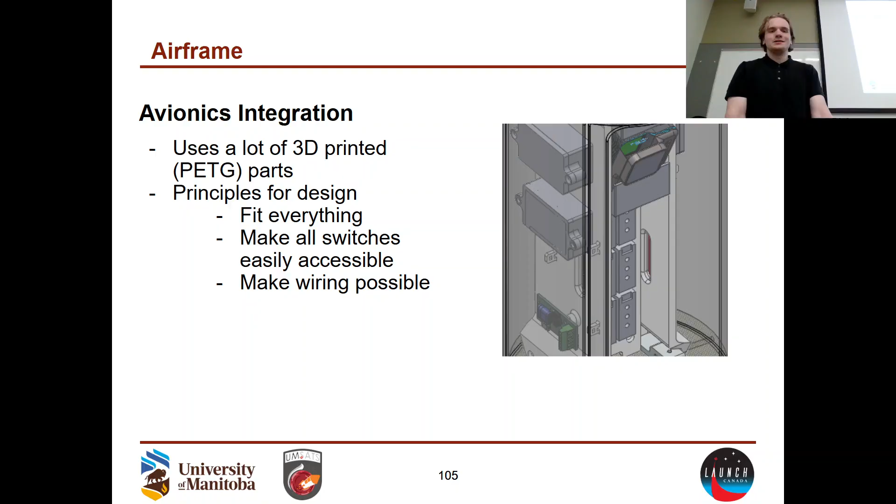Payload and operations integration: Operations has this thing called ping, where it's a post-launch noise detector. I didn't ramble about it a lot in this presentation. Jane, if you're watching this, sorry, I had to draw the line somewhere.

Make it fit, make them happy. Payload is probably going to be stationary because of the need IREC imposes, where they really don't like deployed payloads and they'll be on your case. Make it fit, and I hope future airframe leads always have someone at least look at it, because when it's a couple days before launch, you realize you haven't thought about every little detail of fitting the payload. It's not a fun couple days.

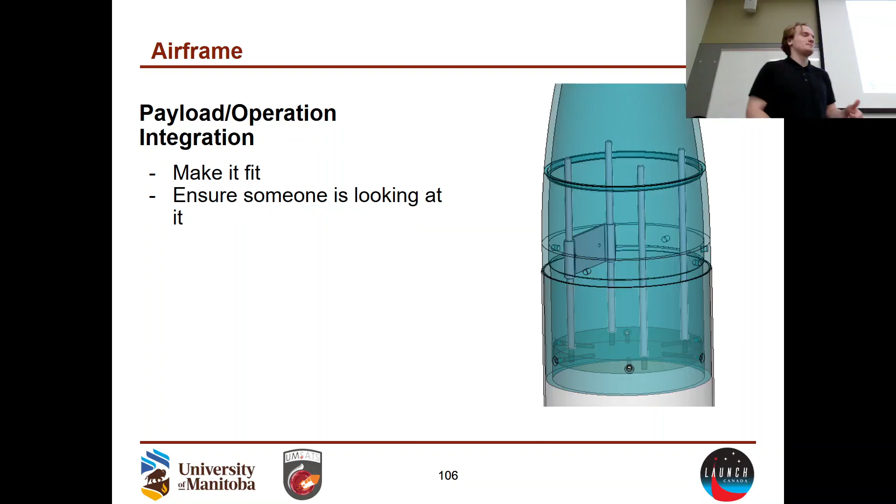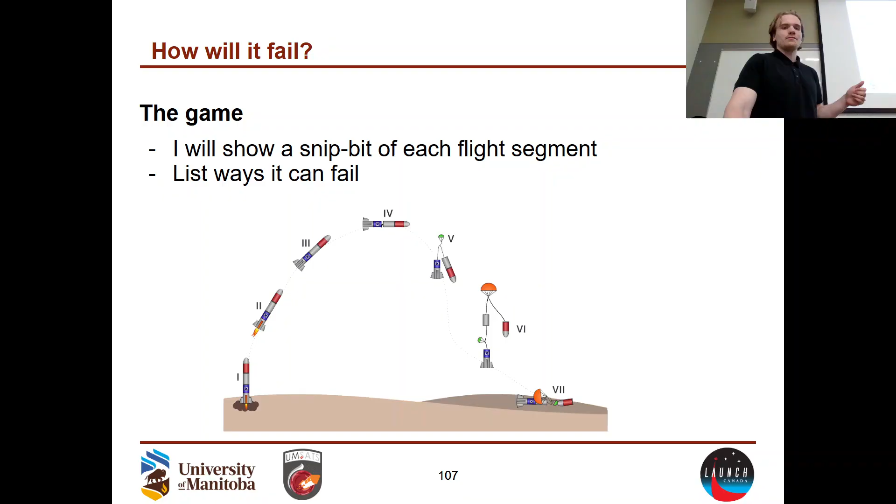All right, we're gonna play a game. Here's the launch projection. I'm going to snippet every moment of the launch and have you guys guess ways you think things could go bad. We're going to assume analysis has been done, but we're going to acknowledge as much as we can that can go bad. Okay, ready? What can go bad here?

Electronics, if for a commercial off the shelf motor, it's just the electronics either not working or a spark not being strong enough. With a commercial off the shelf system, we're just left to hope that they have the right system. They typically have two or three igniters though, so if there is a misfire, then we're probably good to go. But it's really annoying because we're like, it's about to launch and it misfires.

Thrust transfer not being strong enough. We do analysis, obviously. If that happens, you're gonna see the motor go straight through the rocket.

Something coming loose is also an issue. What if there's a connection point that's gone and now we don't have the drogue deploy? We can't really monitor that at the moment. If the rocket starts to launch and we lose telemetry immediately, that's really annoying. We're gonna have to watch the live stream footage again to try to find where it went to locate it.

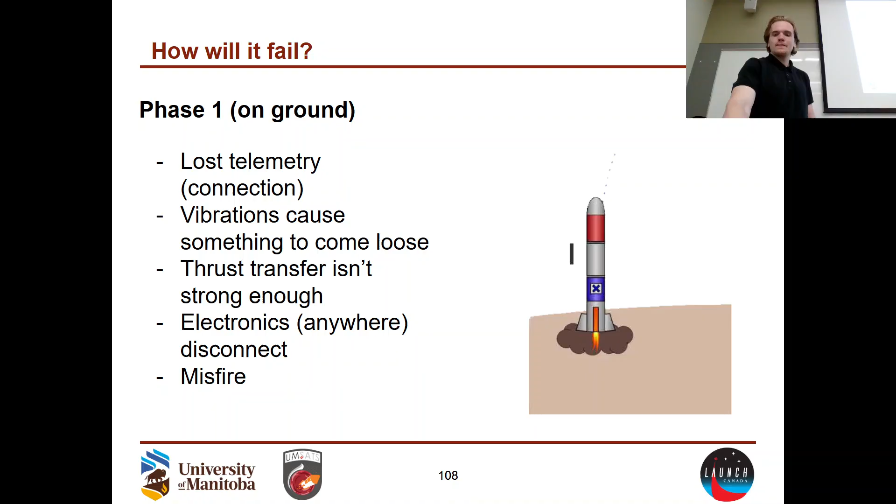All right, anyone have anything? Okay, yeah, that could suck. I'll give you guys a hint. This is when the forces are the highest.

Depends, what was it called when you're vibrating? Flutter too much? Yeah, good one. I didn't think about that one actually.

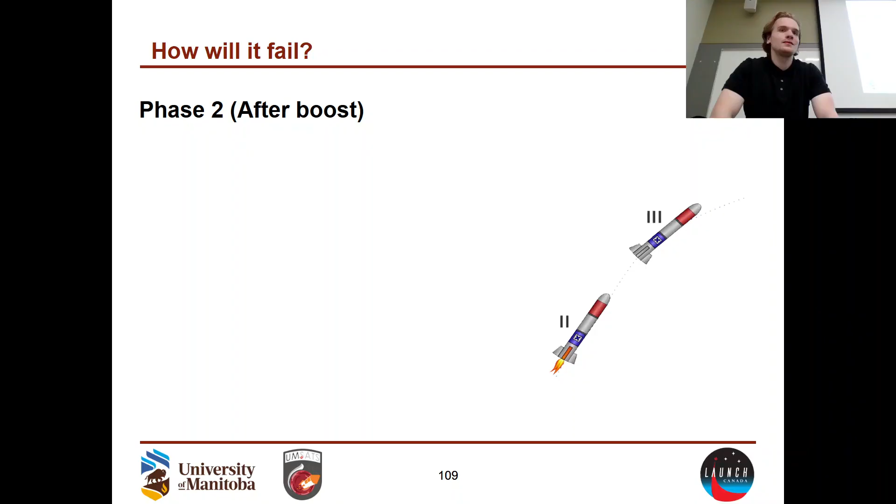I'm just gonna go down the list of every component on the rocket and say at this point, if it's gonna break right here. Actually, Winning 4.5, you can find it IREC day 3. Maybe I'll do it after. That is when it failed. I don't take pride in this, but Winning 4.5 went into pieces everywhere, and it happened right about there. You saw it boost, and then you saw confetti.

But the chute firing early, I've seen one or two launches do it. It kind of looks funny depending on when it happens, but that's going to be right. You have forces here, now you have another mini explosion here. That might cause some crazy damage to happen.

I broke it. Did I break it? No, I didn't. Oh, I broke that. That's nice. Okay, but anyways, at this point of the launch, this is when we're gonna see if it's gonna break, it's gonna break here.

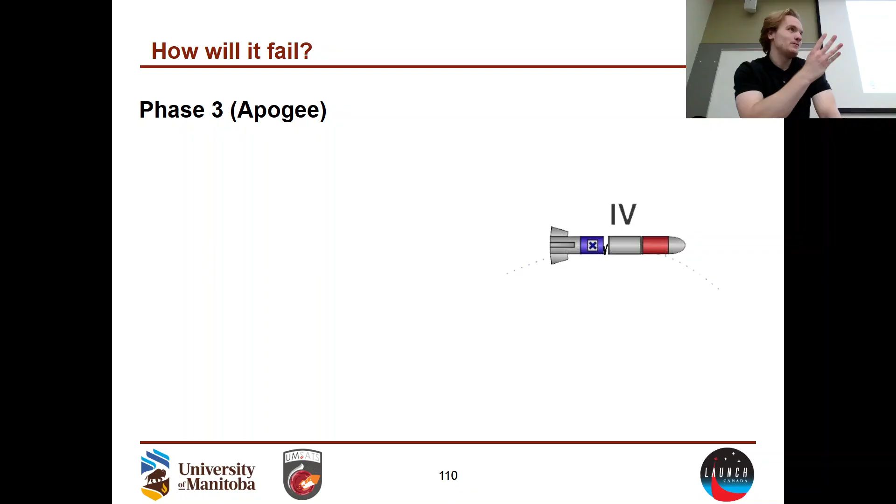The other thing that really sucks that has happened a lot for a lot of teams is the main deploying here. You're not finding it, especially if you're going way more than 10,000 feet. But the thing we're more scared of is no deployment happening.

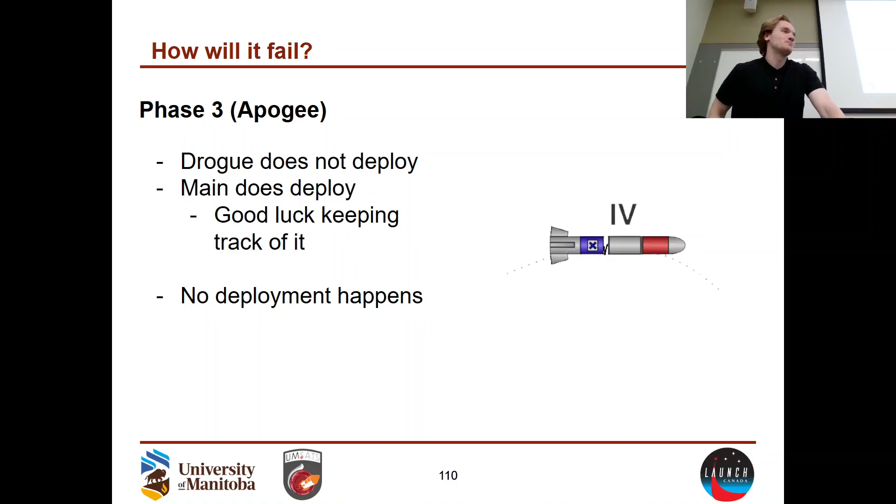Okay, drogue deployed. You actually brought up all the good discussions there too. Anything I talked about that's a recovery risk earlier, flames going everywhere, etc. That's gonna happen around here. It would also be really annoying if you did your math wrong and one of these happens.

And then also, I was scared of this last launch. There were some rips in the tethering because we didn't think to order more tethering. And so I was hoping in my head that nothing ripped beyond failure.

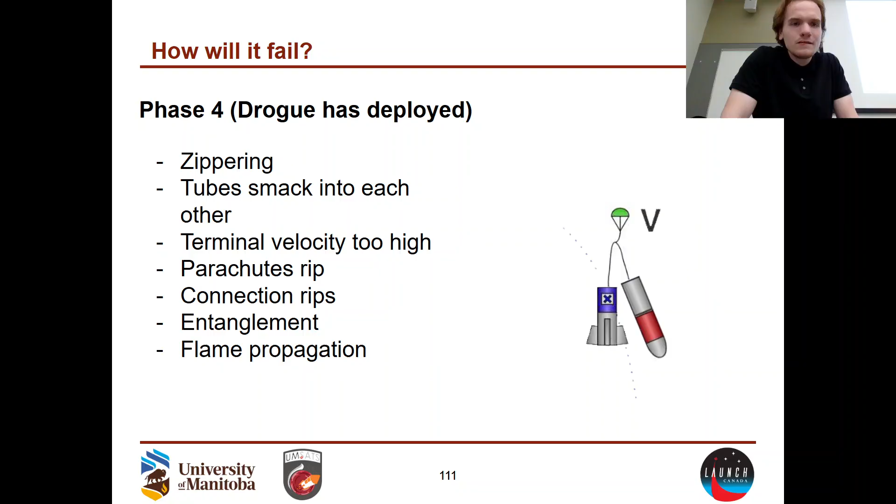What? Okay. I should have had an intermediate phase. Let's pretend the main is about to deploy, but hasn't deployed yet.

Turth was in here earlier. He was the guy in charge of it. So shout out Turth.

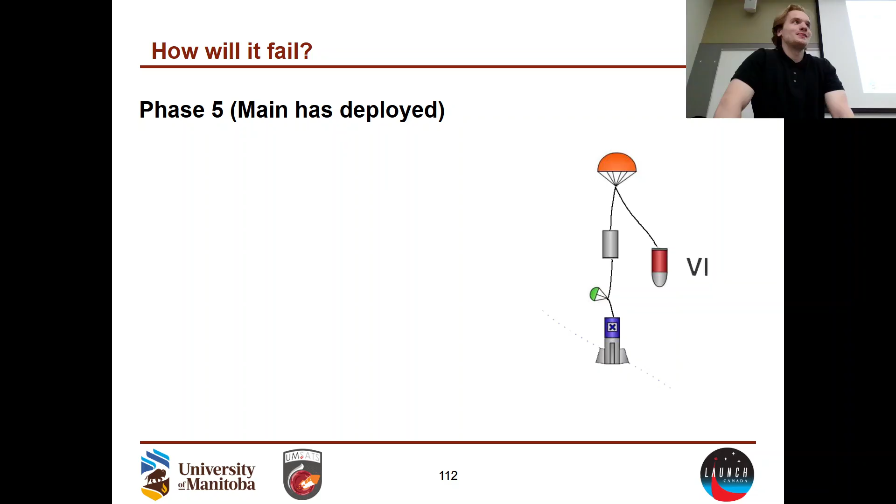But yeah, everything that was brought up in the last step, as well as the potential of main not deploying, the rocket's gonna go -- I think we had 60 something meters per second. That's really fast to hit the ground at. As well as zippering. Losing connection to the rocket would be unideal to have right now as well too, because we don't know fully where it would land, and we'd have a big circle to guess from.

The other thing I'll ramble about is sometimes there's an aspect of luck with the launches as well. If our rocket ends up in a bush and the bush rips the parachutes up, we can't say we're able to launch as is because our chutes are ripped up, right? So sometimes we could just be unlucky and it lands in a bush.

At Launch Canada, there's also typically at least one rocket that ends up in a body of water, which there goes your electronics. Congrats on the nominal launch. There goes your electronics.

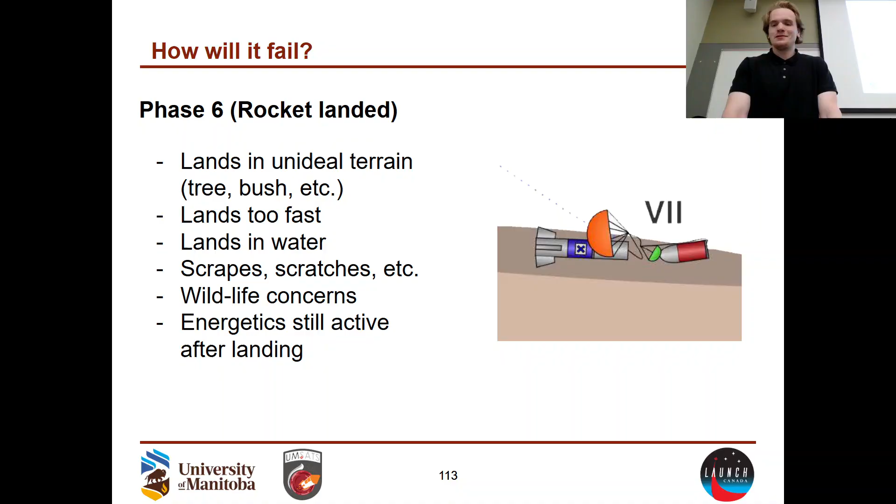Last part, common tools we use. I just want to ramble about them real quick. SolidWorks is used in CAD.

You'll see a lot of the critiques on SolidWorks being that they're kind of good at everything, but they're not great at anything. They're good for CAD modeling, good for static analysis, good for fluid analysis, but they're not great at anything. If you look at each individual component SolidWorks brings to the table, you're gonna find someone that can do it better, but you're not gonna find someone that can do everything SolidWorks does as well. That's my take on it, at least.

We use Discord a lot. I love Discord. I hate that I'm saying I love Discord because there's the bad connotations to it. But you can find old chats and segment conversations really good with what they have.

I think that's all the discussion I want to have. Oh yeah, you can also find everything quick, very easy. They have a lot of good search tools, so you can search if there's a link and then find an old link in a chat really easily.